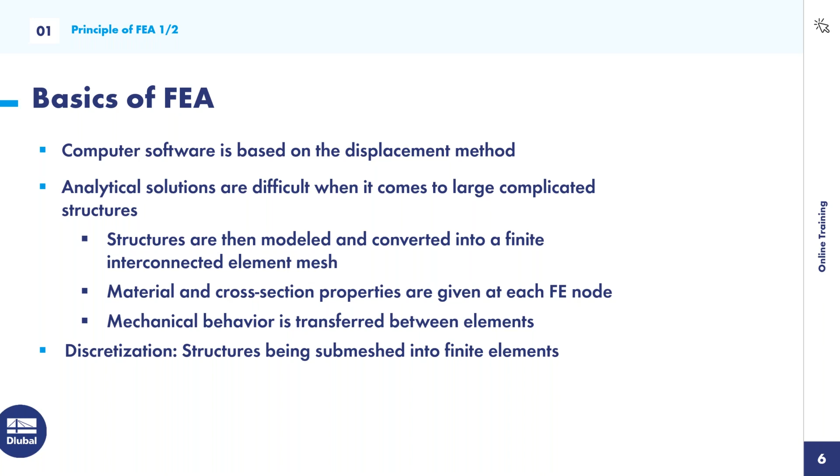The next thing to briefly get into is the FEA calculation workflow. I'm no expert on this, but I want to give you the overview and basic general knowledge of how the workflow is listed step-by-step and how it works within an FEA calculation.

The first step the program goes through is determining the local element stiffness properties. Second, the program changes stiffness properties at each node and converts this into the global coordinate system. Then the composition of the entire structure takes place.

Boundary conditions or supports are then defined, and these can consist of sliding supports, rigid supports, and hinge supports, as you may be aware of. Fifth, the displacement vectors can be determined by solving the system of equations, as we spoke about. Lastly, the support forces and internal forces can be determined—that is, the results of the structure.

With that said, with the general knowledge of how the workflow works for FEA, we can dive into our next example, which will be our continuous plate example.

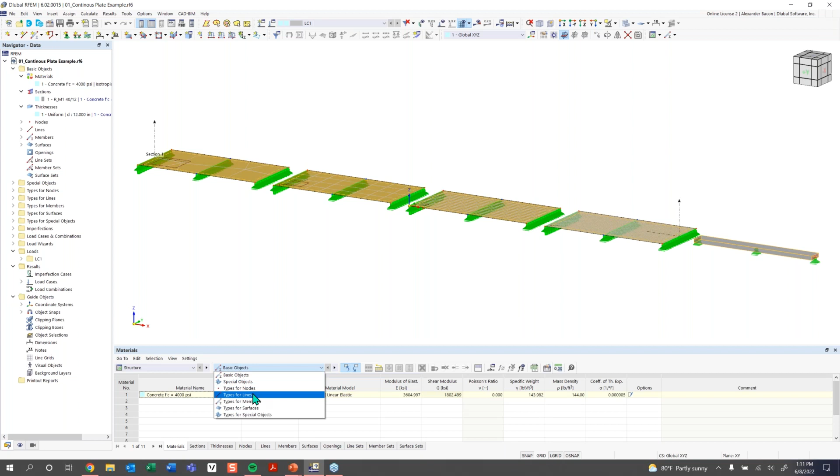Right now we're looking at our static analysis, but we can change this to just the structure. If we change the table here to structure, we can view all of our model data here listed and organized in these tabs down here. Basically anything can be edited down to the coordinates of a node.

So if I go to basic objects and node, you can see we have our coordinates for our nodes here, and these can all be adjusted. Also within the tables is where if any design work is being done, this is where all of the input data and results are going to be shown down here in the tables.

Next, you may notice that my background in my work window is white. Sometimes it can be black by default if you've just recently downloaded RFEM. The color of the background can be changed to whatever you would like. For example, if you go up here to options and you prefer a black background or a white background, that's under display properties.

In the general category, we have background here, and you can change your background color to basically almost any color you'd like. I'm going to keep mine as white, as I think for presenting it allows you guys to more easily see what I'm working with.

And that leads into the work window. Here's the work window. I can rotate my model, I can play around with it, I can manipulate it. So the work window is where almost all of your modeling will get done.

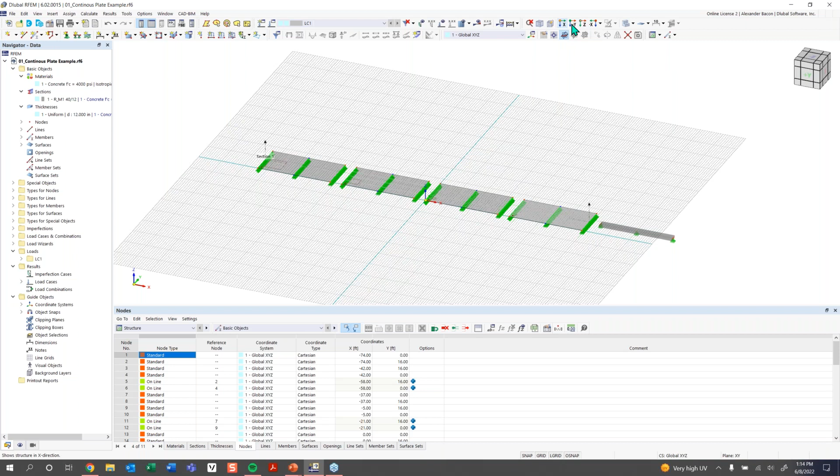Then next we have the views up here. You can use these view buttons to change the view of your model, like so. And a new addition is the cube up here, which also allows you to change your views as well. So this is one way to look at and change the view of your structure. You can also hit this button and it will give you an isometric view as well.

Next, in the navigator here, right now we're looking at the data panel. There are multiple tabs down here in the navigator. This first tab is called data. The second tab is called display. Within this display tab, I can collapse all of these subcategories, such as model and results. This display tab just allows you to turn graphically off and on anything that's shown in the window here.

It doesn't deactivate or remove anything from your model structurally. It just deactivates the graphics. So if I went under model here and turned off surfaces, you can see the surfaces disappear. This doesn't actually remove the surfaces from the structural analysis portion. It just turns off the graphics. You can also turn numbering on and off. So that's the display tab, where you'll find all of that stuff.

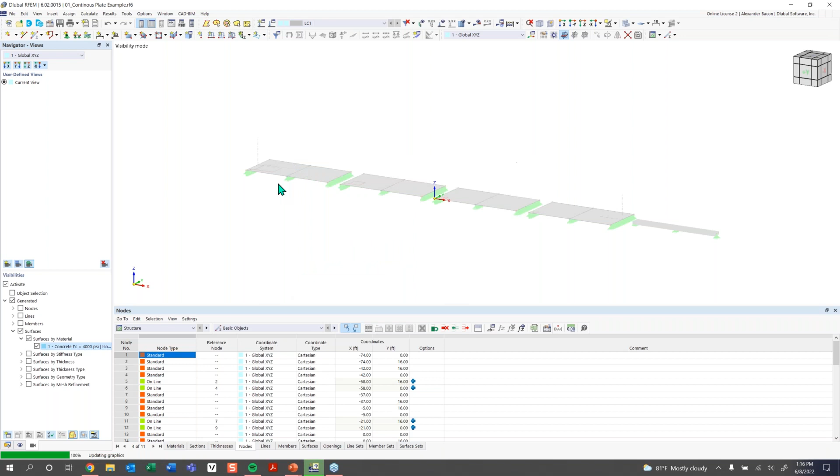Next, we have the views tab. This works a little bit similarly to the display tab, but with a function called visibilities, which can be activated. Once I activate visibilities, I don't have anything in my model that's deactivated. But let's say I only wanted to view surfaces that have a concrete material. Once I activate the,

Okay, so a little bit of a crash there. Let's just reopen RFEM by closing out of that. And we can open RFEM back up. Sorry, everybody. One second.

While that's opening up, which should only take a couple seconds, we can do a poll. Throughout the training I will be giving questions, and this is the next one. That will launch now. If everyone could read it and answer it, we can go over the results and the correct answer afterwards. I'll give everyone a minute, and we can continue after that.

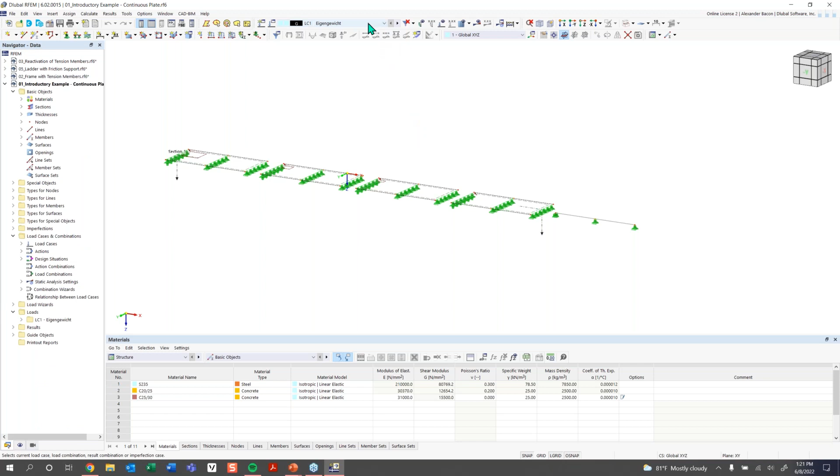Now jumping back into RFEM, the next thing I want to do is quickly run an analysis. So we're just going to run the results of this model real quick.

And then we're just going to quickly go over the results, nothing in detail. So just wanted to show you that once the results are run, this fourth tab here in the navigator panel is going to appear. As you may have seen before, we only had 3 tabs, but now that the results have run, we have 4 tabs.

And then you're going to see these collapsible categories here. So we can either show our deformations, member results, or surface results. And this is how you turn on and off the results you would like to see in the work window on the right-hand side here. So things like member internal forces, such as normal axial forces, shear forces, moments, torsional moments, things like that you can view on your members. And same with surfaces, you have internal forces and stresses, etc.

And also, when you're manipulating your model within the window here, if you have a mouse with a scroll wheel, you can click down on that middle button to move your model in translation. You can hold Control and click the middle mouse button to rotate the model, and then you can use the scroll wheel to zoom in and out.

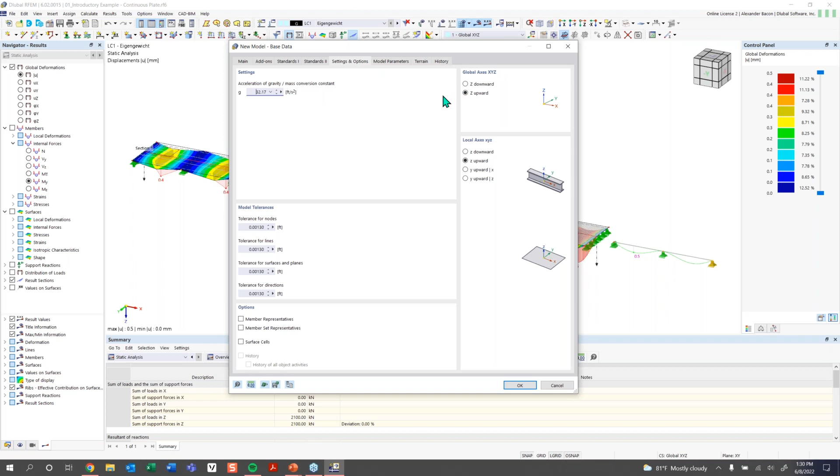And now everything else we don't need to worry about. These other tabs we're going to skip for now. And all we need to do now is click OK. So once we click OK, a blank model will open up. Sometimes materials from other models can be carried over into this blank model. So I'm just going to go under here and delete those. Maybe some other sections can be carried over as well that are previously defined. I'm also going to delete those along with some thicknesses that were defined as well.

So now you can see in my work window, I just have a blank grid here. Now this grid can be customized. So let's go into the settings for the grid plane here. You can see we have grid points here. So if we go up here to this button, settings of work plane, grid/snap, etc., if we click on this, we can take a look at our settings for our grid here. So right now, the basic information is that we have 50 by 50 grid points here. Right now, my units are in meters, as you can see. So those points are spaced by meters.

I know this is an international training, so that's why I want to show you that we can switch between imperial units and metric units. And you can do that in almost any dialog box. So you can see there's this button down here, units and decimal places. If we click on that button, you can see under model for all of my units that are related to modeling, they're all in metric right now.

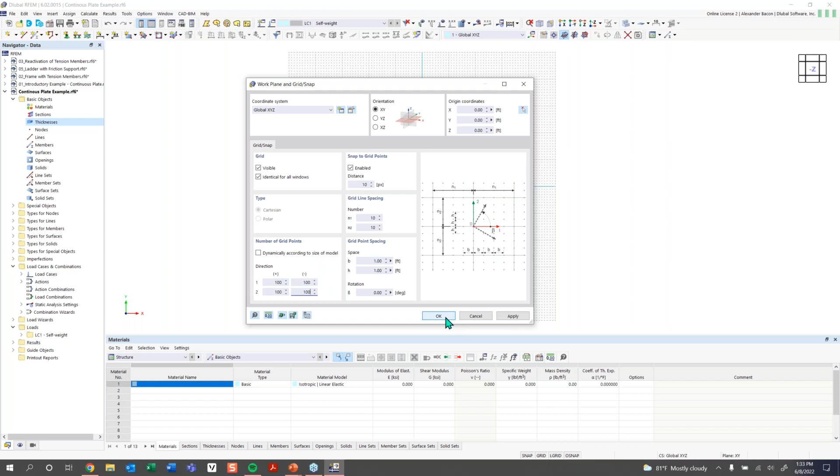For this model, I would like to change this from 50 by 50 to 100 by 100. So we can take that and I can just copy and paste the rest of this. So in the positive and negative direction and in directions 1 and 2, which you can see in this graphic over here on the right-hand side to help you understand that, it's going to be basically a 100 by 100 grid. So I'm going to click OK. And now you can see my grid here is, just going to save this real quick.

You can see my grid here is 100 by 100 now. And yeah, so now that we have the grid set up correctly, we can start to just model our first continuous plate. So I'm going to zoom in here and I'm going to go up here to new rectangular surface. And this is the first tool that we want to use. So I'm going to click on new rectangular surface to create this continuous plate.

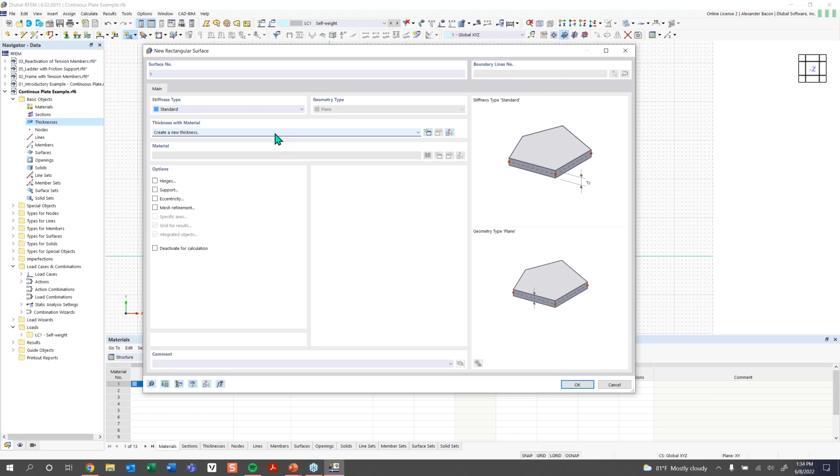And now you can see this dialog box will pop up called new rectangular surface. And then we just need to define a material for this surface and a thickness for this surface. So first, we need to define a thickness. So I'm going to click on create a new thickness here. And the new thickness dialog box will pop up. So basically with the thickness, you can see what that is defining on the right-hand side here.

Normally you can think about this as with a beam member or column. That column requires a material and a cross section. So as an analogy, you can think of the thickness as the cross section and then we just need to give it a material. So every surface requires a thickness and material. So we're going to make the thickness of this surface 12 inches. And then we're going to go here to material. And when choosing a material, you want to click on the button Import from Material Library.

And under the Material Library, you can see there is a filter section on the left-hand side here. So you can see you can filter by region. So we have a long list of regions that you can pick from to find your material. For this training, I'm just going to use some US materials. So I'm going to click on United States, and then I'm going to click on material type, concrete. And so then once I filter to the material type that I would like, you can see for concrete, there's the subtype of material. I'm just going to choose regular old concrete.

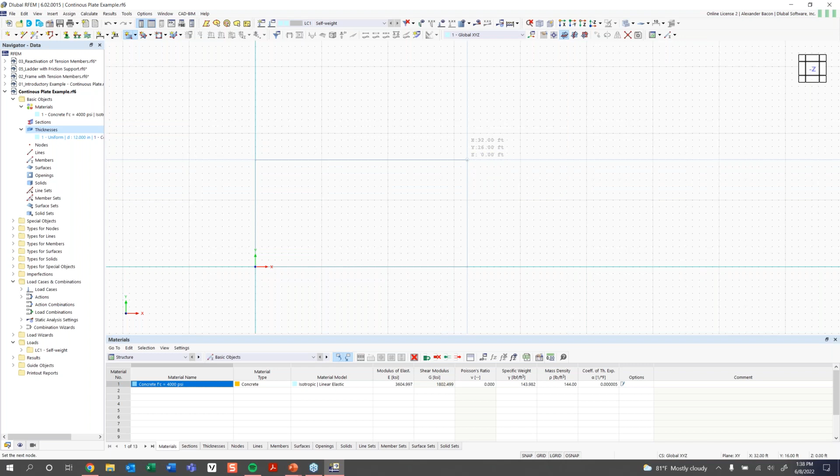So we're going to first snap to the origin here. So I'm going to left click on the origin, and this first surface is going to be 32 feet by 16 feet. So I'm going to go 32 feet in the X direction, and then 16 feet in height. And with the rectangular surface, all you need to do is define 2 corners. And so now you can see my surface is defined. And now all I need to do is either hit escape, or I can right click anywhere and simply exit out of that tool.

Now the next thing we want to do is draw a line down the center, directly in the middle of this surface. And to do that, we can go up here to the option New Line. And so you'll see the New Line tool will pop up, and now I can simply snap to the center of the top of this line here, left click, and just draw this line on top of this surface like so.

So that's how you can create a new line and draw a new line. So we can right click out of that and right click again to exit fully out of that tool. And now you may notice that these nodes here are a different color compared to the corner nodes here. And if we double click on one of these nodes to edit them, this is something I just want to go over real quick, is that these nodes are set to the node type On Line.

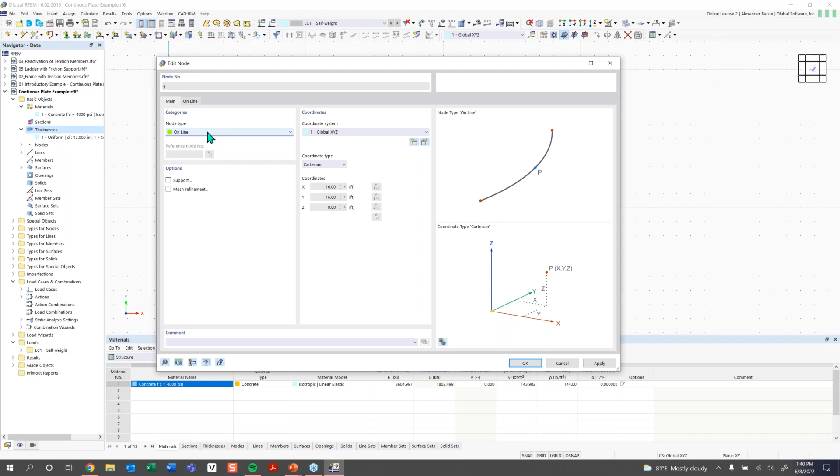And what this means is if I click OK, this means that these nodes are integrated into the line that they're connecting to. So if I double click on this line and edit it up here, and I go to the tab here, Nodes on Line, you can see that the node is being recognized and connected to the line that I'm editing. So if this node was set to just the normal standard type that nodes are usually set to, they wouldn't be integrated into the line they're connecting to. So this is done automatically, but just good for your knowledge to know that there's different node types.

Now, the next thing we want to do, now that we have our concrete surface here, is we want to support it. So we want to continuously support the left-hand side of this plate here. So that means I want to add a line support to this line here on the left-hand side. So to do that, we can double click on it to edit it. And then we have a list of options here. We want to add a support to the line. So that means this tab support here will pop up.

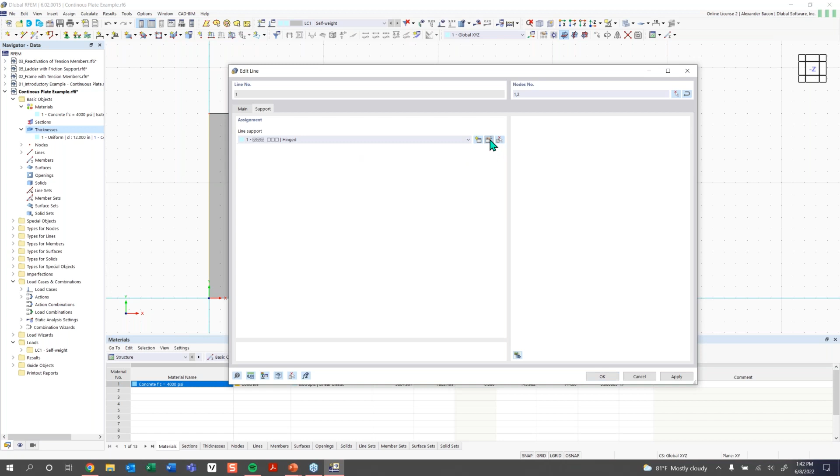And then under line support, we can hit this drop down. And you can see we have a couple of preset definitions for what our line support should be. I want this to be a hinged line support, and a hinged line support means that the first 3 degrees of freedom, or translation degrees of freedom, are fixed, so the support can't move in the X, Y, or Z directions, but rotation is fully released, so that is a hinge support. So we'll click OK, and click OK again, and now you can see if I rotate the model, we have our side here fully supported by those hinge supports.

So also another thing to point out is if I double click on my line here in RFEM, you will always see the nodes that are making up your line, or also if I edit this line support here, you always see the assigned line that goes with this line support. So in RFEM, you're always going to know what objects are connected to each other by this upper right hand corner here, and that kind of helps you understand what's connected to what. So always clear there.

So now we can highlight our other 2 lines here, which we would like to add supports to. So if I hold Control and I just select these lines, there's also a button up here called Assign Line Support. So I'm just going to select that tool, and RFEM is going to remember my selection before I clicked on that tool. You can see lines 3 and 5 here are selected. And none of these presets here are the definition of line support that I want. So I can create my own definition by clicking on the new definition button here.

And this support, I want it to be able to slide in the translational X direction. So I'm going to uncheck UX here, which fully releases the direction in the global X direction, but you can see it's still supported in the Y and Z direction, and rotation is still fully released about the X, Y, and Z axes as well. So I'm going to click OK, click OK again, and now you can see those supports are added to my lines there.

Next thing we want to do is now create a surface load, but before we can do that, it is very important to know that any loading that you apply to your structure must have a load case assigned to it or associated with it. So the next thing we want to do is create a new load case. So you can see we already have our LC1 load case here already created by default. The program will always create or have a load case that's already created. So what we really can do is just click on the edit active load case here to look at that.

So this is where you can create load cases. You can have multiple load cases, and these will go into your combinations, but we're not going to get into that this training. We're just going to focus on one single load case here. It has no action associated with it, and we don't need to worry about that since we're not doing any design or load combinations. So what we can do is just deactivate self-weight here on the right-hand side and delete the name of this load case, so it'll just be called LC1. That's how we will refer to it. I deactivated the self-weight since we don't want to take that into consideration, since we're going to focus mostly on how you can compare your models to your hand calculations, for example. So now I want to click OK.

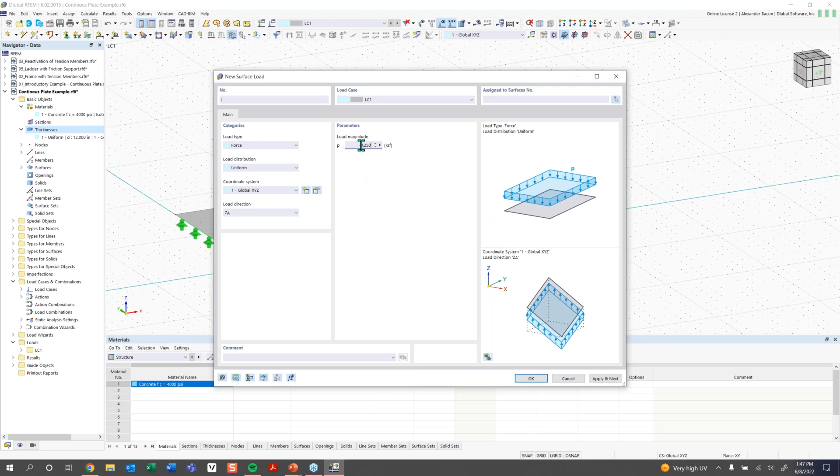So for the loading, we just need to give it a magnitude. It's going to have a magnitude of negative 0.25 KSF, or kips per square foot. We give it a negative value so it acts in the negative direction. So we'll click OK. Then all I need to do is tell the program which surface to assign this to, so we'll assign it to this first surface here. Now you can see visibly, or graphically, our loading here. Something else you can do is right click on this loading and adjust the size of it using this slider here, if you wish to do so. So now we have our plate here, it's supported and it's loaded.

Next thing I want to go over is the FE mesh settings, which are very important if you have a surface or any surfaces in your model. To access the FE mesh settings, we can go up here to this button, hit this drop down, and access what's called the mesh settings. This is always important to look at before you run any results. You can see these are the general settings, and right now under target length of finite elements, this is set to 1.64 feet, and this is going to be the global length that a finite element is set to throughout your entire model. So if this isn't changed, this will be the length of your finite element.

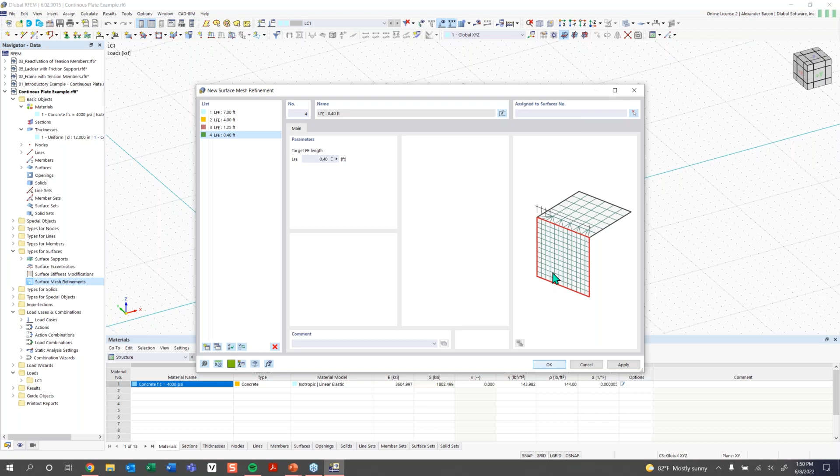The next thing I want to do is make a copy of my surface here. I'm going to highlight the whole thing, and use what's called our move/copy tool. With this tool, you can move something, make a copy of it, or do both at the same time, which is what we're going to do. We're going to create a copy, and we're going to create 3 copies of the surface, and we want to displace them 37 feet into the X direction. This allows for a 5-foot spacing between each of these copies, since the surface is 32 feet long. So now all we need to do is hit OK.

Now you can see I made 3 more copies of my surface here with all these supports and everything, and they're each 5 foot spaced apart.

So now with our copies made, we want to create our single member, or beam member, that we're going to use to compare results to.

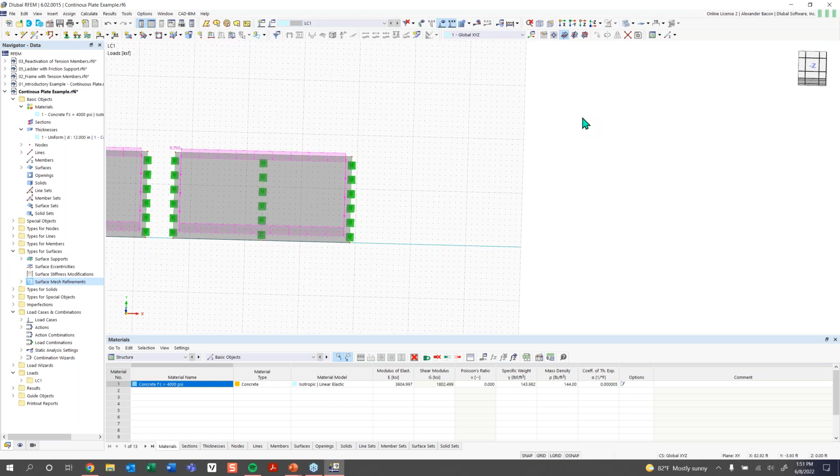My grid here is a little off, so I'm going to highlight all of these plates and drag them to the left a bit so we have some space on the right hand side to model the member. I'll hit reverse z-axis direction, then go up to the button create new member.

Under new member, we're going to use the member type beam. This member type allows the member to take tension and compression forces and have fully fixed connections.

What we want to do now is tell the program what cross-section this member is going to have and what material it's going to be made of. To define the cross-section, go down to section with material and click import from section library. Here is the cross-section library in RFEM 6.

You have different categories here. The category we're focused on is the massive category, where we can choose our massive rectangle section. With this section, you can define the material. I already had a preset of our concrete 4000 PSI material, an isotropic linear elastic material.

If this wasn't already defined, you can click on the material library, which is the same material library we've looked at throughout, from the surface.

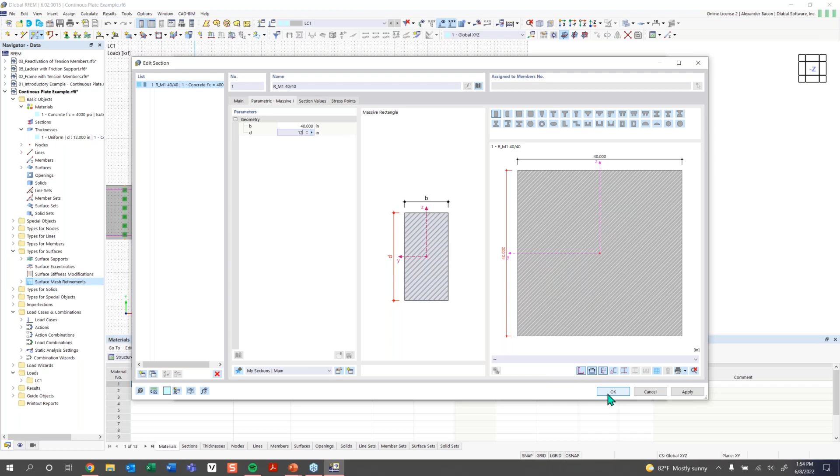Next we want to define the parametric massive, or the dimensions. So we'll go under the parametric massive tab. I'm going to define the base, which is going to be 40 inches, and then the depth of the section is going to be 12 inches. This is similar in depth to our surface, which is what we're comparing to. With that defined, we click OK and OK again.

Now I can just draw my member, like how I drew that line before. I'll start drawing it 5 feet away from our plate, right in the center. I want this member to be the same length as the plate, which was 16 feet, so I can draw that, or just type it on my keyboard without moving my mouse: 16 feet, and hit enter.

Actually I wanted to make that 32 feet, sorry about that. Control Z real quick, and let's draw that one more time — I wanted that to be 32 feet.

There we go. Then I can right click, and now you can see we have our member drawn the same length as our plates here.

Now this member is just floating in space right now, so we need to support it. I want to add a support directly in the middle of it, and to do that I need to add a node.

What I can do is divide this member by right-clicking on it, which brings up my shortcuts menu. I'll go under member, divide member by a number of intermediate nodes. We really need to divide it by one node, so we're adding a node to the middle of the member.

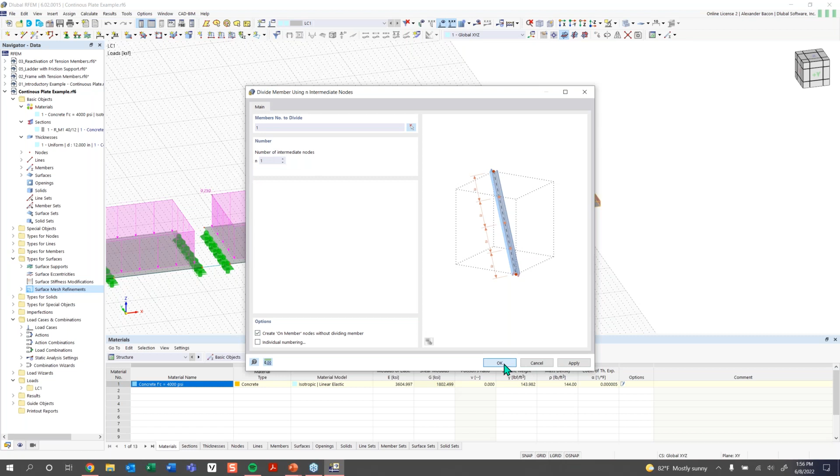And now it's a little hard to see that node, but it's right there.

So now if I just highlight this first node here, we want to add our nodal supports. I'm going to go up here to nodal support instead of line support, since this is for nodes. We'll click on nodal support.

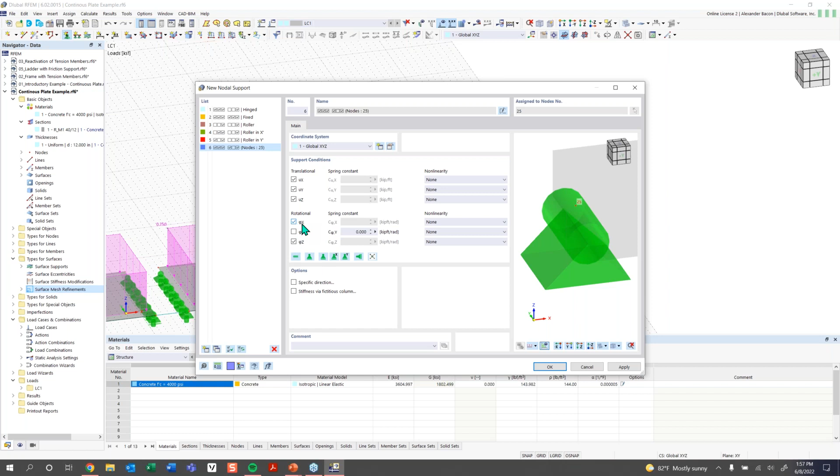And we want this support to actually not just be a hinge support. You can see we have some presets here for nodal supports. We're going to want to create our own definition here, and I will explain why in just a little bit. But we want all of our translational degrees of freedom to be fully fixed, but we also want our rotation about the local x-axis of our member, or about the global x-axis of our member, to be fixed as well. So we're going to click OK.

Click OK again, and so now you can see that support, the rotation about the x-axis is fixed there. And now we're going to add in our other supports. So our other two supports for the middle and end of our member are going to be rolling supports that are allowed to roll or move along the global x-axis here.

So we'll click OK. Oh, I just changed the support by accident. Let's just undo that. So again, we're going to choose rolling support. And with this, now we can just assign our support to our nodes here.

So the reason we needed to fix the rotation of the local x-axis for this one is if we didn't do that and all of these had the rotation fully released for all 3 degrees of freedom, this member would be allowed to spin about its own local x-axis indefinitely, causing an instability in the program. So always keep that in mind when you have a member that has torsion fully released on it, as that can cause an instability in the program.

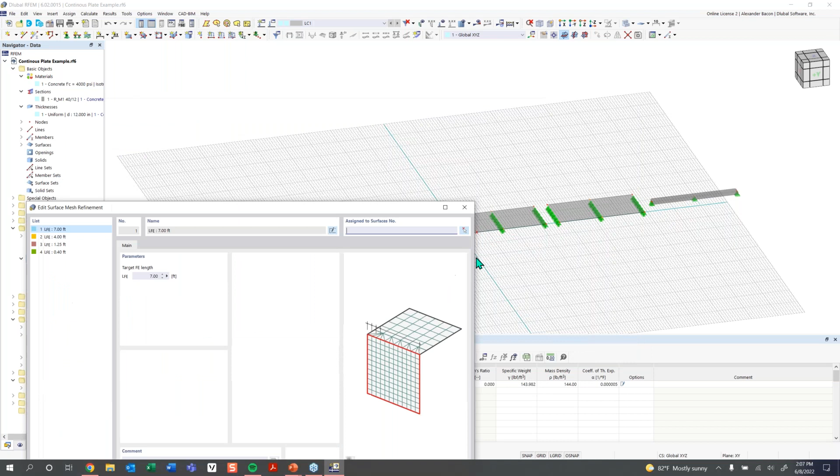So what we want to do is I'm just going to right-click on surface mesh refinements, hit edit, and go through here and assign them to our surfaces. So we're going to assign this first one to our first surface, and you can see we can do that graphically by hitting the button there and clicking on our first surface, clicking OK. We can do the same thing for our second refinement. Select surface here, select our second surface,

and then for our third one, again, we can do the same thing graphically, or if we know the number of our surface here, we can just type in 3, since this is surface 3 here, and then type in 4 for our last refinement, and hit OK. So now they change from blue to normal default color, and you can see we have these icons here now on top of our surfaces. And this is how you know that there's a surface mesh refinement on top of our surfaces here.

So now that we have those refinements, we can generate the FE mesh. And so to generate the FE mesh, you can do this manually. Normally this is just done once you run your results, but you can generate this mesh manually. So if we go up here to this drop down here and hit generate FE mesh, this will run the solver, and then our mesh will be displayed on our surfaces here.

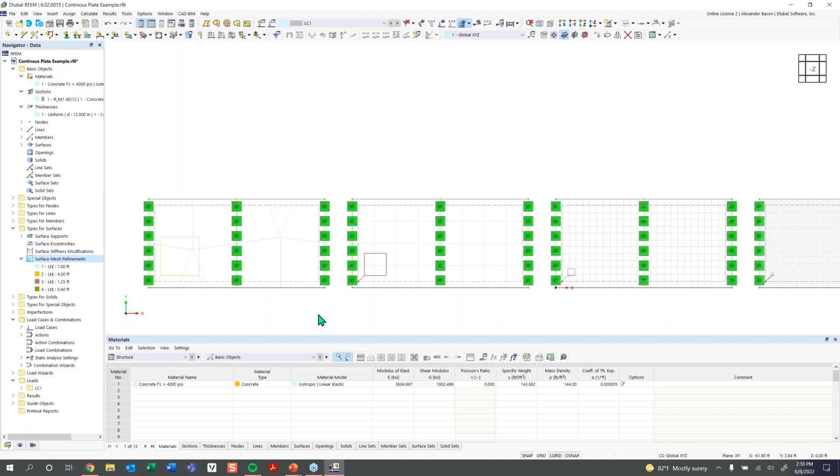So you can see gradually as we move from left to right here, our FE mesh starts out pretty wonky. And then the smaller the finite element gets, the finer our mesh gets and starts to look a lot better. So this is as we, from left to right, decrease the size. This first size was 7 feet, and you can see it goes from 4 feet to 1.25 feet and gets smaller and smaller. So this first surface here, I would expect very inaccurate results from this surface. And as we move from left to right, the quality gets better, and I would expect very accurate results from surface 4 here on the right hand side.

So the next thing we want to do now that we created our FE mesh is add in a results section that will cut through our surfaces here. So to do this, we can go up here to this button, set new results section. And to set a new results section, it just needs 2 points, point A and point B. We can click on this button up here, select 2 points graphically, and you can see I can snap to the center of my first surface here.

And I'm going to draw this results section all the way through all of these surfaces here. So now we'll have a result plane section cut through all of our surfaces. And this is based on the global coordinate system, and it's going to be set in our global z-axis. So that's where the plane will be located, projection direction, and we can click OK. And now you can see we have these arrows here for our section cut. So it is in the global z-axis plane, and that's how our results will be shown.

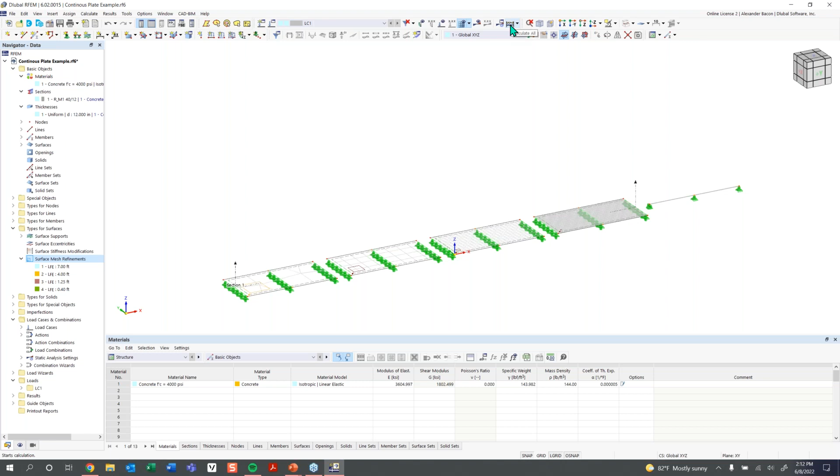So now we can calculate our results. We can go up here to this button called Calculate All. I'm going to click that, and RFEM will run through the solver and go through that FEA workflow that we talked about earlier and give us our results. Right now it is showing us the deformations, and also you'll see the results tab will pop up here. And whenever you run your results, I always recommend taking a look at the global deformations first. This is always just an easy first visual way to check that everything is defined correctly and everything looks as you would expect.

So if I look in this side view here of our model, the deformations are looking good, and they're looking just as we would expect them to look. Now, whether this side is accurate or not is up for discussion, but the internal forces are also the next thing we can take a look at. So we can turn off global deformations up here and check on members here.

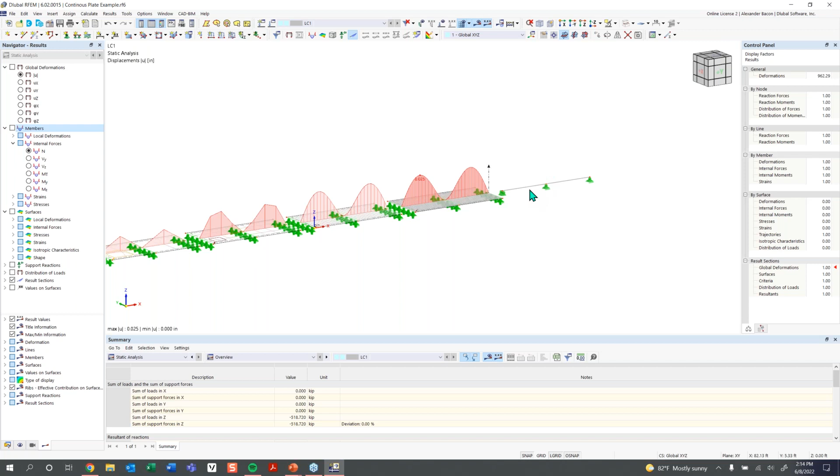And before we check on the results for the members, what we want to do is compare the results of our last surface here with the results of our beam here. So what I'm going to do is select my surface here and select my beam. And what I can do is create a visibility by selected objects using this button.

And now you can see the other objects have been grayed out in the background, and now the only ones visible are the plate here and the beam. And what I'm about to show you is very important. So if we take a look at the results on the member, I'm going to check those on. You can see, one second, that my internal forces should be shown.

Oh, so what we need to do is check on moment. So we have checked on the results for members, and then under the internal forces here, we want to check on moments about the local y-axis. So that's what's being shown right here on our member, the moment about the local y-axis of our member.

So if you ever need to see how the local axis of the member is oriented, you can right click on any member and turn on the local axis system of the member. And so now you can see what that local axis system looks like right on the member, and you can see the moment distribution about the y-axis here. Let me turn that on.

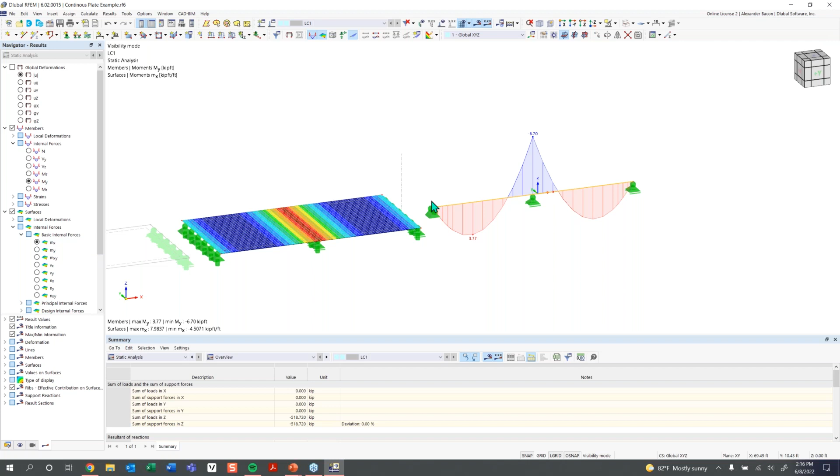This means that for the surface, these are our bending moments in the direction of the local x-axis of the surface here. So if I right-click on the surface, I can turn on the local axis system, and you can see the direction of that. And so we're showing the moments along that axis.

And so now if I turn on my results section, or I'm going to have to cancel out of this visibility. If I select these plates and members, there we go. So now you can see we can compare directly the moment distribution between our beam and our plate here. And these should be basically the same.

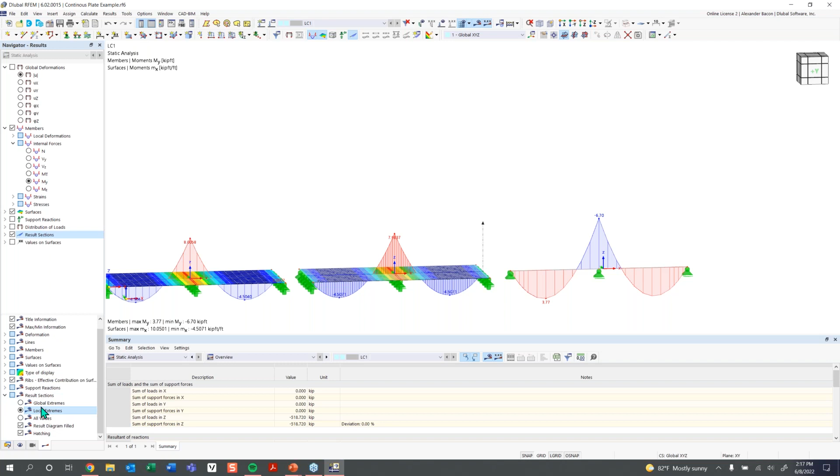So I'm going to also turn on results sections down here, turn on local extremes. So you can see that we have our results here, and they should be pretty close to the beam. And also we can show our shear force distribution as well. So I'm going to turn on the shear force in the Z direction, and then turn on the shear force for our surface in the X direction. And so we can compare those two.

So I was wondering why our results are a little off here. So you can see I typed in the wrong magnitude here for either the beam or the plate here. So I'm just going to change this to negative 0.25. And then rerun that calculation real quick. And we should see better comparison between those two elements.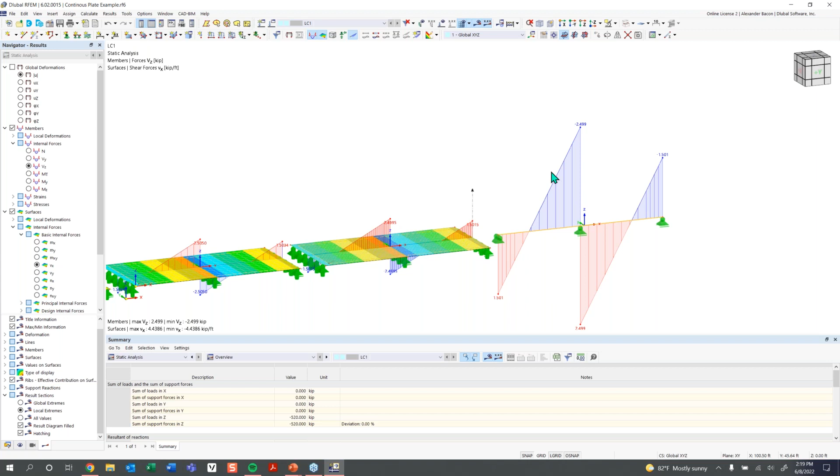Okay, so now you can see we have a max shear force here of 2.4995 and a max shear force here of 2.499. So you can see between our plate and our beam here, we're getting very similar results. So this is how you can view the internal forces of a plate or beam.

And I just want you to keep in mind for these forces here, what the lowercase axis symbol shows, and these all refer to the local axis system of what they're showing, so for surface and beam. So I'm going to clear those visibilities.

Also, there was a question about how to show the values on a surface, so I'm going to show that real quick. To show the values on a surface, we can simply go down here to values on surface and check that on.

And then you can see that the value is shown for each, if we go down here to result values, or we have to go to, if I can find it. So we have values on surfaces turned on, and then right here under values on surfaces, right now each value is set to a grid point. We can also change this to each FE mesh point, and you can also turn on symbols and numbering.

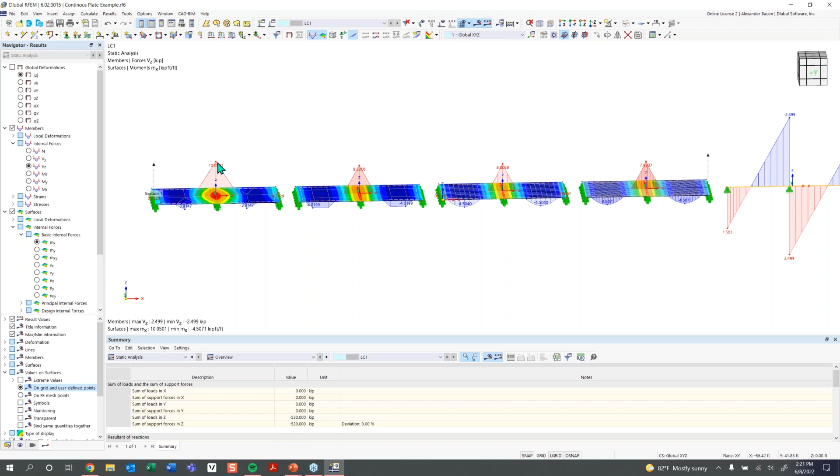So if we take a look at each plate here, you can see that the bending moment is different for each one. Starting with this plate here, we have about 10 kip foot, and you can see how that's decreasing, and each plate here with a decreasing mesh size is getting closer and closer to our control member here, which is what the result should be closer to. So you can see how inaccurate the results are for this plate with the super coarse mesh size.

So this shows the importance of making sure that your FE mesh is as fine as necessary, but as coarse as possible, because if you don't check your FE mesh before running results, they can be inaccurate. But also, it's important to keep in mind that if your FE mesh is too fine, such as this last plate here, this can increase your calculation time. So if you have a large model and too fine of a mesh, your calculation time can greatly increase. So what I recommend is something like this third example here, where it's as fine as necessary, but as coarse as possible.

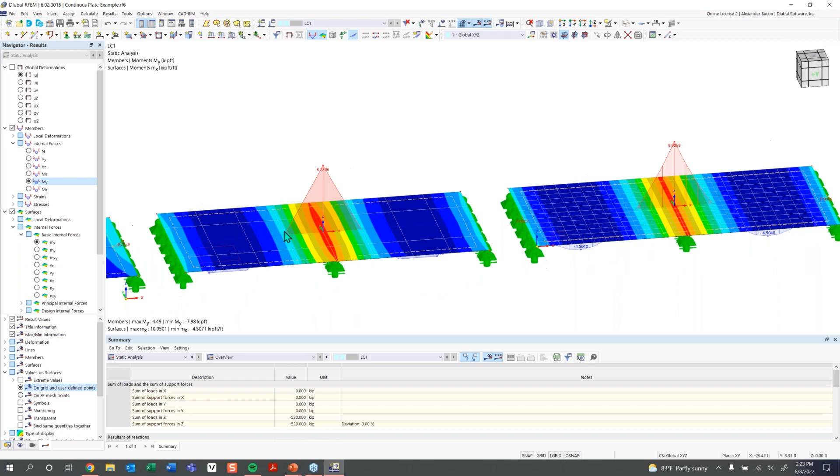And another good rule of thumb to keep in mind is to have at least 4 FE mesh blocks between any span or boundary of your surface. So 4 FE mesh blocks between any line here is probably the minimum you want your mesh to be at. So something like this would be too coarse, where we only have about 3 FE mesh blocks, or is that we have 4. So this would be about the minimum of how fine you would want your mesh to be. But as you can see, the finer the mesh, the more accurate the results.

So next thing to look at real quick is the result diagram of our section here. So if we right click on our section, we can take a look at the result diagram. So right now we're looking at the internal forces mx along our result section here. And this is interesting because you can see what changing your mesh size does, and having a finer mesh adds more data points along this line. And the more data points, the better our moment diagram starts to look. So you can see it starts off very rough and then gets finer and finer.

Now I'd like to get into talking about shear stiffness. So with shear stiffness, such as for this beam, if you want to do hand calculations and compare them, you would have to take into account shear stiffness effects. Taking into account shear stiffness leads to increased deformation due to shear forces, and that also leads, in turn, to increased moments. So this also plays a major role with things like concrete, because the thicker something is, the more shear stiffness deformation effects you will have.

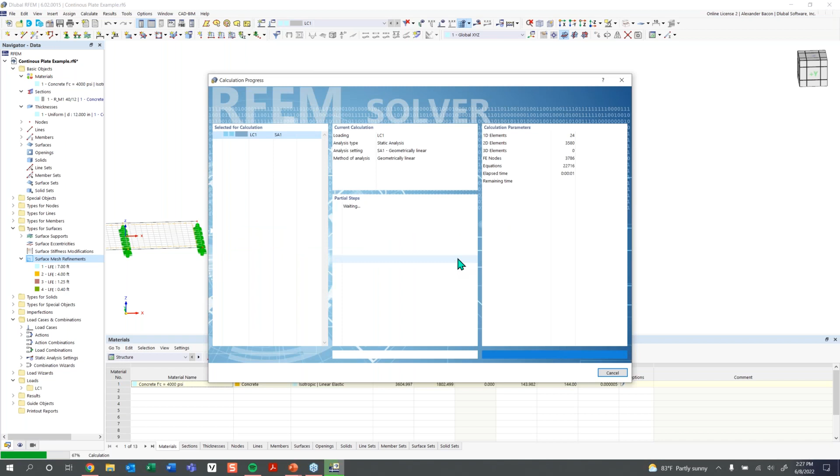So if we deactivate shear stiffness and click OK, the program's going to tell us this is going to require us to delete the results. We'll click yes, click OK again, and now we can run our results again, and we should see our results change based on checking off this option.

So now you can see we have an increased moment here a little bit. Results haven't changed too much, but you can see the moment has increased by a little bit. And this is because we deactivated the shear stiffness, or taking it into account with this beam.

So now I would like to just give another question or another poll. So I'm going to throw that up on the screen now, and you should see that in just a second. So I'll give everybody a minute to answer this question, and then we can go over the results and answer afterwards.

So the first theory for beam elements is Bernoulli's, and the second theory is the Timoshenko theory, or what's also called the deep beam theory. So with the Bernoulli's theory, we're making some assumptions, and these assumptions are first that the cross section remains in plane and also perpendicular to the member axes. And the second assumption is that we do not consider any shear deformations. And what this means is that the shear stiffness of the beam is completely rigid. So that's the assumptions that are made with Bernoulli's theory, and this is what you're probably familiar with when doing hand calculations.

The assumptions we make with the Timoshenko theory is that the cross sections remain in plane, but they don't remain perpendicular to the member axes. So the shear deformations are taken into consideration here, and the shear stiffness is limited and is not completely rigid. So this is the more realistic approach, and also you can see down here that we're not only taking into consideration just the deformations from bending, but also deformations from shear as well.

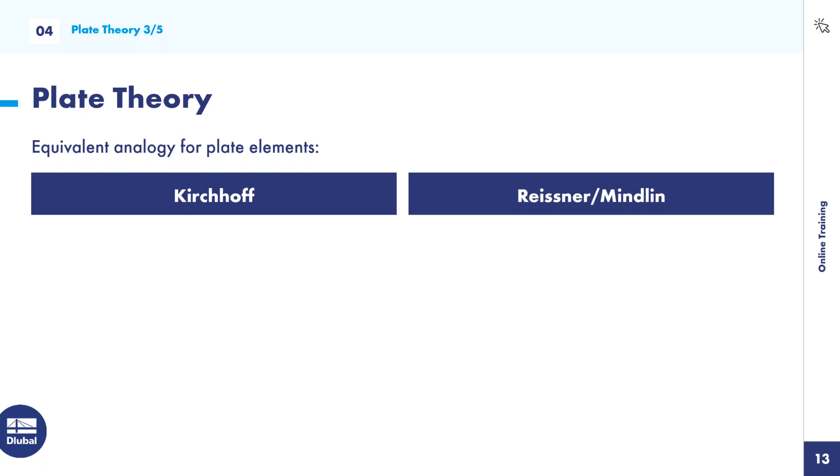So here are the assumptions. So for Kirchhoff's theory, we assume a geometrically linear or small deformation analysis. We assume that a linear elastic material is used, so we're referring to Hooke's law. We're also assuming that the cross-section remains flat and there's no warping of this plate. The plate has a constant thickness. And we're also assuming, which is the biggest assumption, that there's no consideration of shear deformations. And that's with Kirchhoff's theory.

Now, maybe you'll be able to guess, but with the Reissner-Mindlin theory, we're assuming all of these same assumptions basically, but the major difference is that we are taking into consideration shear deformations, and including this, we are taking into consideration transverse and lateral strains. And so to clarify a little bit more on transverse and lateral strains, we can go to the next slide here. And here we can get a better look at what the transverse and lateral strains look like.

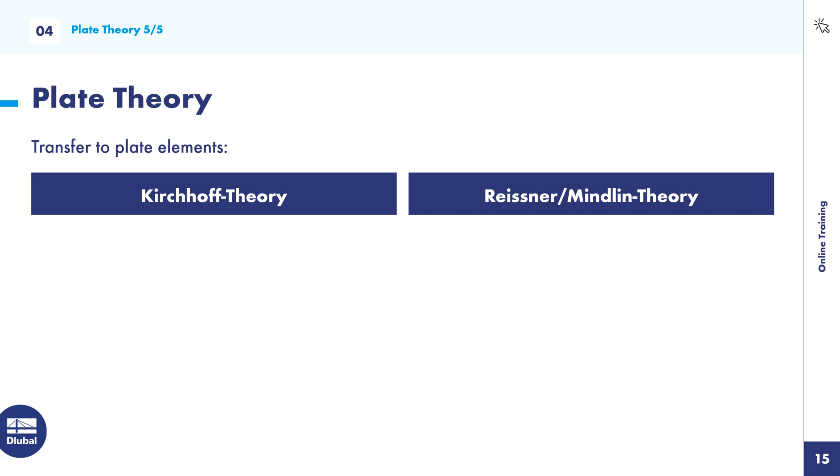So again, just to summarize, Kirchhoff's theory for plate theory yields pretty good results when using very thin plates, for example, concrete slabs, like the ones we're using in our example. But you have to keep in mind that this only considers pure bending load bearing capacity, and this is just a simplified approach, but works fairly well for thin plates. Again, no consideration of shear deformations with the Kirchhoff theory as well.

So Reissner-Mindlin theory, on the other hand, is great for thin plates and thick plates. So the thicker the plate gets, the bigger the delta you'll see in the difference of results, and the more inaccurate Kirchhoff's theory becomes because of the shear deformations. The effect of shear deformations will greatly affect the thicker plates. And so in my opinion, the Reissner-Mindlin theory should just be used by default, but it's just good to know the difference between the two.

Now we can go back into RFEM and look at where these settings are located. So I'm going to switch back to RFEM. And if we go under the navigator here and we go under data, we can go under the load cases and combinations here and go under the static analysis settings, and we'll just go under the geometrically linear settings and edit these. And if we edit them, we can go under basic settings here, and you can see that the plate bending theory here, you can change between Mindlin or the Kirchhoff theory. Like I said, Mindlin should just be used by default, but it's just good for your knowledge to know that we have the option between these two theories.

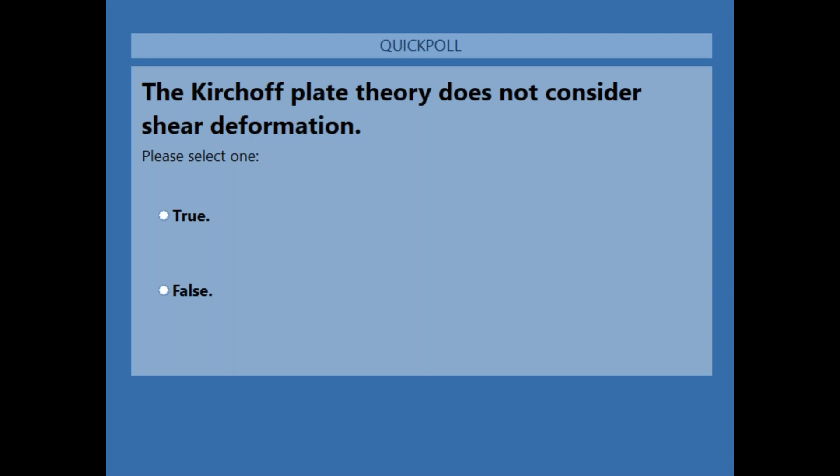All right, so I'm going to close that question and show the results. Awesome, everyone got this one correct. So the Kirchhoff theory does not consider shear deformations. That is true. The Mindlin theory does consider shear deformation, so great job. All right, I'm gonna hide that.

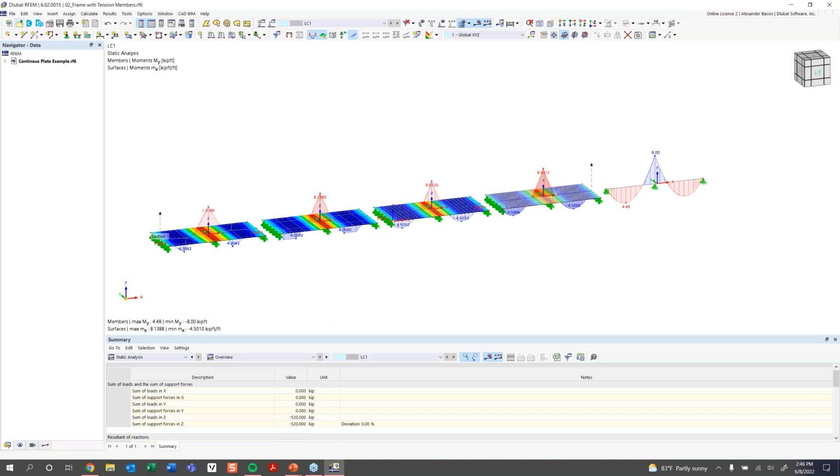So we're going to go back to RFEM and look at some examples of these nonlinear calculations. I set up another model, and I'm going to open that right now. Again, these models are going to be provided to you guys. You'll get them with the recording early next week or the beginning of next week, so I would expect these to show up on your end at that time.

For this model, I set up a frame, and this frame has some tension-only members in it. If I double click on one of these members here, on this cable element from this X bracing, you can see that the member type here is set to tension.

With this frame, we're going to just imagine that the top of this frame here is connected to another building. I'm going to turn off the grid here so we can imagine that the top is connected and braced by another building, and so we need to basically brace this wall in the global X direction here. This is the reason why we needed to add this X bracing in.

Like I said, this X bracing, we're assuming that these elements can only take tension, almost like a cable element where the cable or rope just cannot take compression forces. This is a nonlinear element, meaning that it can only take tension.

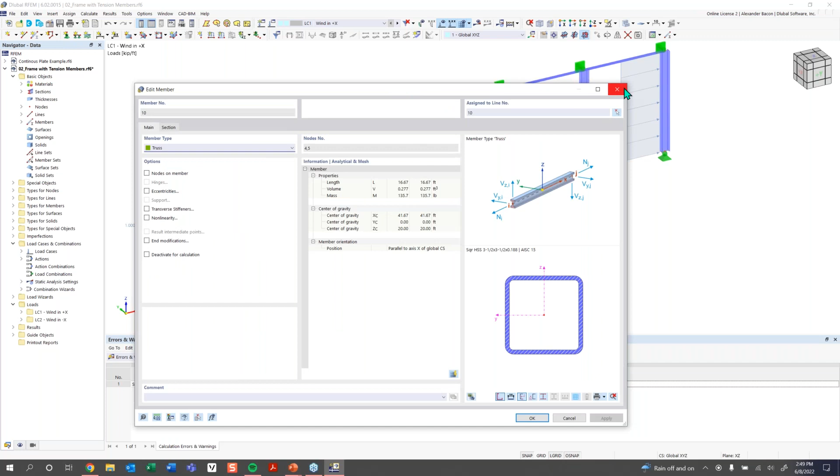The reason for this is because our structure here is just not stable and needs support in the global X axis. You can see that we have all hinge supports here, and these supports up here are not providing any support in the X direction. All of our connections here are hinged, and our members up here at the top are truss members, meaning that the moments at these connection points are fully released. So this whole model is just not supported in the global X direction.

So what we need to do is stabilize this model. And how can we stabilize it? We can do that by adding in X bracing. So I can go up here to new single member, and under new single member, you can see we have member types. So we have beam.

Beam type is the type you are going to be most familiar with. This can take tension and compression and has fully fixed connection points, meaning moments and shear forces are transferred between connections. We have a truss type here, which can take tension and compression, but it can't take moments.

The connection points are fully released, so no moments are transferred between connections. And then we have our tension members. Our tension members can only take tension and cannot take compression. So these are our nonlinear members here.

What we want to do is go into our section here and change our cross section to a 1/4 inch round section here, which will act as our cable element. We'll click OK, and now we can draw back in our X bracing here.

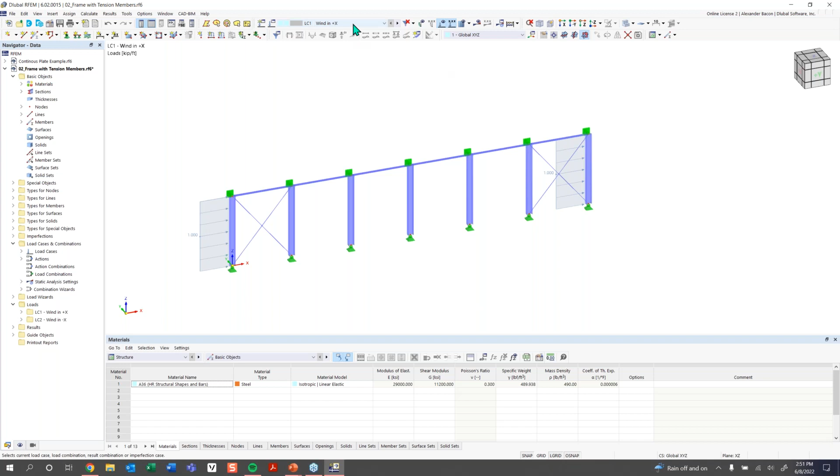So now you can see that we have our results now. And if we take a look at our deformations, we can turn off our loading. You can see that this member right here has extended since this structure has a wind load on it being forced into the X direction.

You can see that this cable element is still activated and taking on those tension forces. But this one here has been grayed out and disabled because it's taking compression and it cannot do that. You can see the same thing for this tension element on the right-hand side.

We can also take a look and check on the results for our members and take a look at the normal forces or axial forces. And now we can see what the axial forces are on those two cable elements that are taking the tension. So red is positive for tension, and you can see the blue here is negative for compression.

And then if we also take a look at our wind loads in the opposite direction, we should see the same thing. So we'll run that.

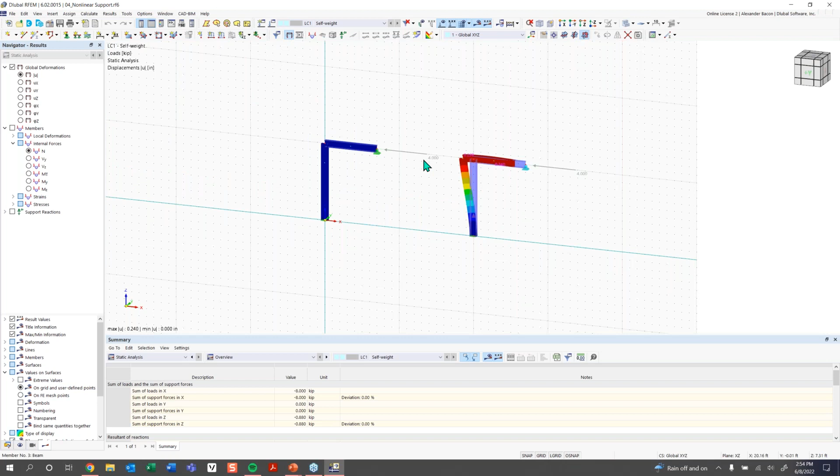That's here. So this next one, we're going to be going over nonlinear supports. With this model, you can see here, I just have two frames here supported at the top here. And you can see that I have on the right-hand side this nodal support here in blue.

The reason why this nodal support is in blue is because it's telling me that it's a nonlinear support. So anytime you see a support that's blue and not green, that means it's a nonlinear support. Green means that it is a linear support. So let's double click on this support and see what's going on and edit it.

You can see under our definitions here, everything looks normal here. All 3 degrees of translational freedom are fixed here. Our rotation about the global z-axis is fixed. But for the x direction, we have a nonlinear set.

If I click on this drop down here under nonlinear, you can see I have checked on failure if negative px. What this means is if this support experiences a negative support reaction, it will fail. It'll disable, it won't add any support if a negative support reaction is activated.

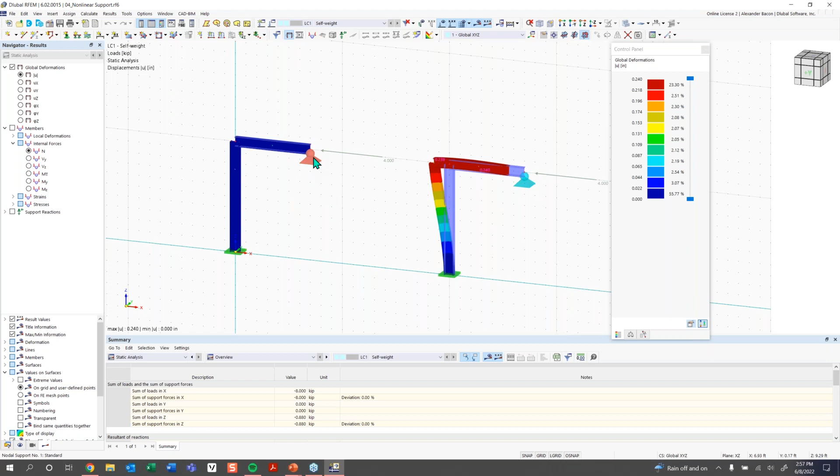You can see this lateral load is pushing on the top of this frame here in the X direction. So this support is going to have a negative X support reaction, but it's a linear support. And you can see here on the right-hand side that our nonlinear support with the same setup is failing because it's experiencing that negative support reaction. So it's disabling, and you can see how that affects our frame here.

And we can also take a look at our support reactions by turning on support reactions here, and we can see those support reactions from the forces there.

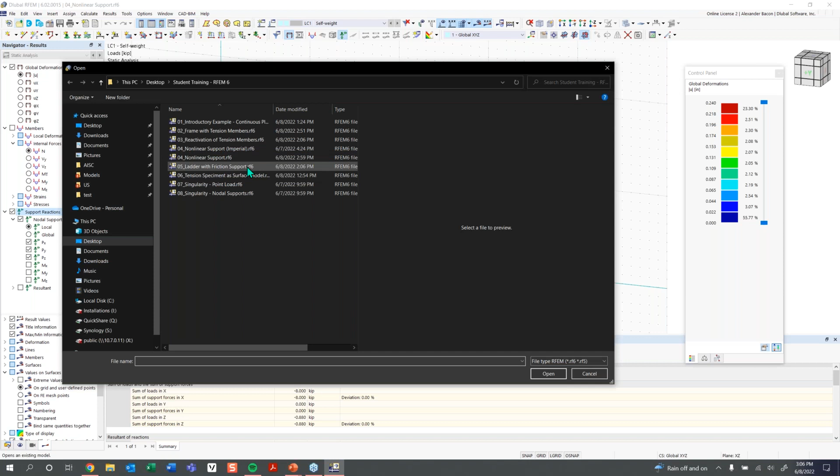And so yeah, that was the last example that we did. So the next example to get into is going to be called a friction supported ladder. I'm going to open up this next example here, and we're going to talk about friction supports.

All right, so here you can see I have modeled and created this ladder here. And with each support here, you can see that each load case has a support that's set to each step here. So I can go through each load case, and you can see that with each load case, the loading gets higher and higher.

On this ladder here. And the goal of this is to see if the ladder is going to receive too much vertical load and if it will slip into the X direction.

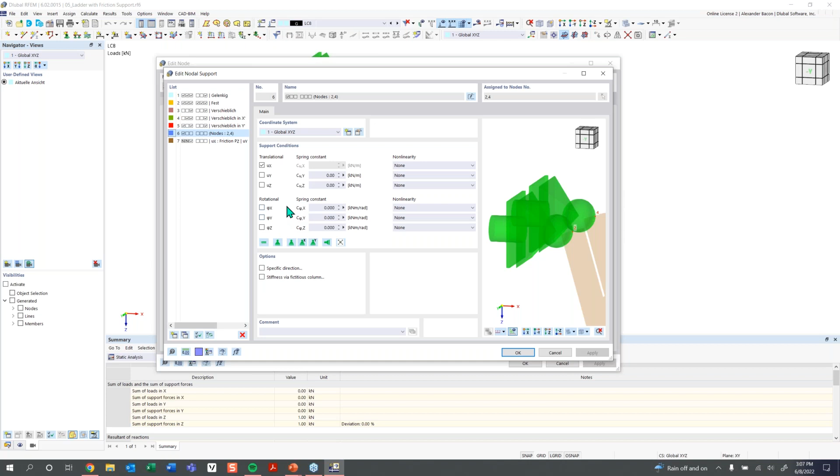So you might have noticed that the top supports here are green, so they're linear. You can also see that they are only supporting the top of this ladder in the X direction. They're not supporting it in the Y or Z direction, and they're not giving it any rotational support. So we're basically assuming that this ladder is just resting up against something, up against a wall like a normal ladder would. It's just resting up there.

And we're wondering, okay, at what point will this ladder slip the higher and higher somebody climbs it? We want to make sure that the friction at the bottom is enough to keep this ladder from slipping out into the X direction the higher and higher somebody climbs it.

So what we did is we made these supports down here nonlinear supports. So if I edit these supports by double clicking on them and looking at the definitions of them, you can see that there's no rotational support.

They are fully fixed in the Z direction, so they're resting on a solid surface, but this ladder could slip out in the horizontal or lateral direction. So you can see in the X direction and the Y direction, we have activated the nonlinearity friction, PZ.

And so activating these, you can see that now we have some new tabs up here for UX friction PZ and UY friction PZ. Now if we look at UX friction PZ, you can see that we have entered here a friction coefficient. And you can see μx, this friction coefficient, is set to 0.2.

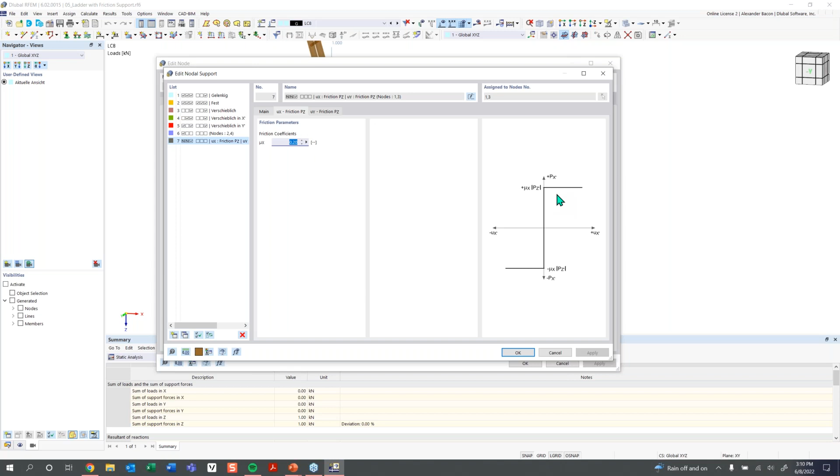And this basically sets a maximum bearing capacity for the support. If the reaction in the X direction exceeds the normal force, Pz, multiplied by this friction coefficient, then the support will fail. So basically the ladder will slip out either in the X direction or the Y direction. So again, this maximum bearing capacity all relies on what the normal force is multiplied by the friction coefficient. If that exceeds the reaction in the X direction, then this support will fail and give out.

So let's click OK, let's click OK again, and let's run all of our results and see what happens. So just looking at the deformations, we can see that for this first load case, where our loading is applied to the bottom rung here, we're fine, the ladder is staying in place.

But as we go to our next load case, as the force starts to go upwards, we can turn on our support reactions and see what our force is in the x direction. You can see we're at 0.03 here, and we're at 0.5 here for the normal force, and as we increase our loading higher and higher, you can see that the reaction in the x direction is increasing: 0.05, 0.06, 0.07, 0.08, 0.09, and boom, at load case 12

here, as we approach about 3 rungs down from the top of this ladder, you can see that our supports have given out, and the ladder is now slipping out because we have reached a reaction force in the x direction of 0.10 kilonewtons, and so this is exceeding our 0.2 multiplied by 0.5 here for our horizontal x direction. So these supports have released and given out, and now our ladder is slipping out.

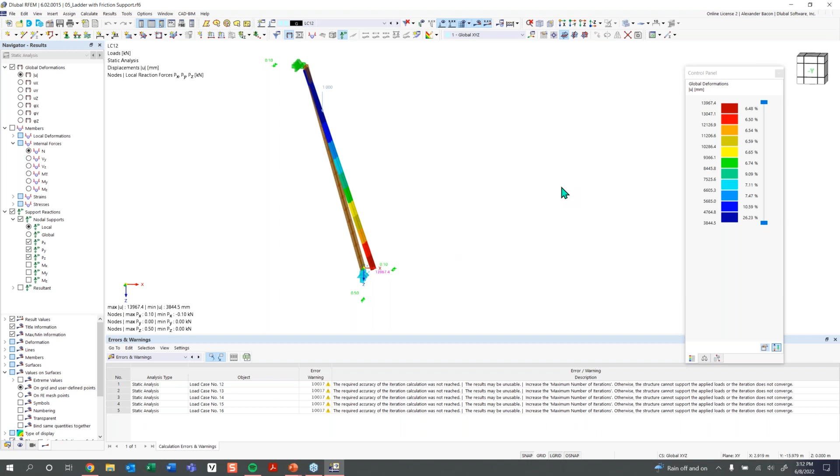So this is basically how you can use friction supports in RFEM and how useful these can be. And this is just one example of how friction supports can work and how they can slip. So moving on, our next example is going to be all about plastic analysis. So I'm going to open up the next model here.

So now with our next model here, this model is just a specimen of some sort, similar to something you would see in one of your material labs. So we can use this to go over the general concept of plastic analysis. The elastic deformation in a structural component is due to a load and is based on Hooke's law. And Hooke's law is the linear stress and strain relationship which most materials go through if it is a linear elastic or isotropic elastic material.

So you might want to take a look at and see what happens after the elastic behavior of the material. Maybe you're curious about what happens after that material is no longer elastic and has entered the plastic region. You might want to see how it's yielded and what the behavior of that component is going to be after it has yielded, and that's basically what plastic analysis is.

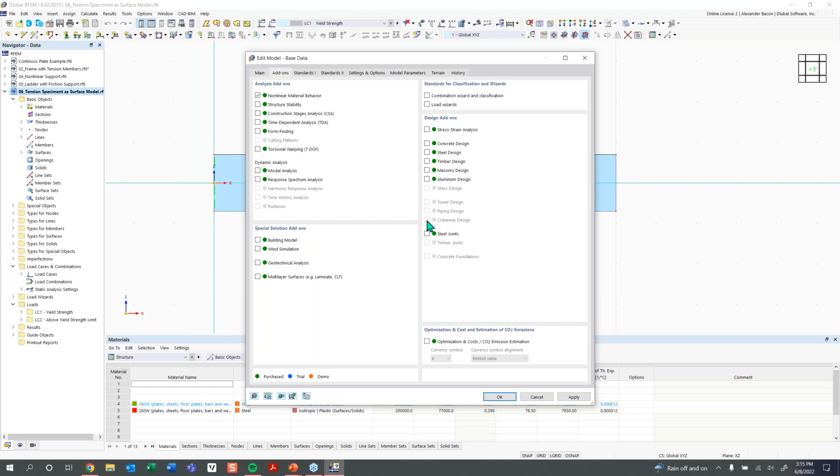Anyway, once we have this add-on activated, we can consider nonlinear behaviors. So we'll click OK, and now we can take plastic materials into consideration. And so now let's run the calculation for this surface with some pre-made defined materials. If I double click on this, we can see we have a thickness here of this plate or specimen. It's 3 millimeters thick.

And you can see the material that we're going to be using is an isotropic linear elastic material. I have another material defined here, and this one is an isotropic plastic material. So first we'll choose the isotropic linear elastic material and click OK. And so now our material is set to that isotropic linear elastic material. It is just steel 260 or 260W.

And so now with our load case here, we can just run the calculation. You can see I have a line load here applied to the end of it, and we have some supports on the left-hand side here. So this line load is going to pull this specimen in tension, and we can run the results and see what that looks like.

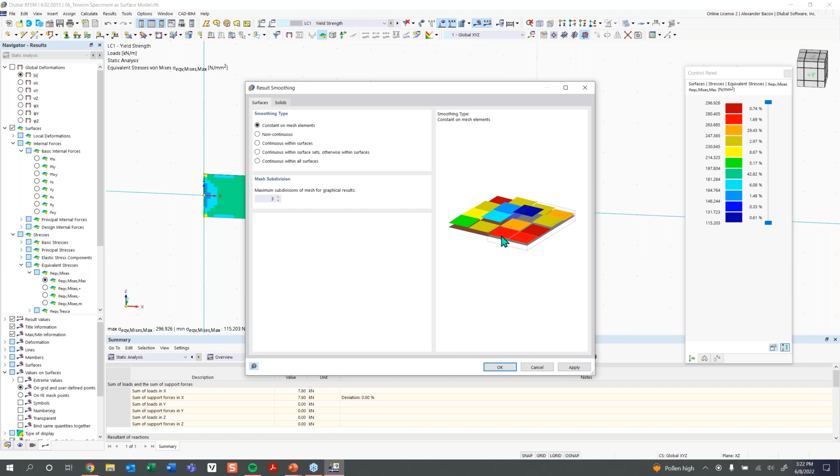Normally, again, by default, this is set to continuous on surfaces, and you can see how each FE mesh element can take into consideration the results from surrounding elements, but we just want to see the average of each FE mesh point on one single finite element. So with that said, we can click OK. And so now we can see the areas of the element that are higher than 260 newtons per square millimeter.

So with my control panel here, we can see the color coordination. I can zoom in a little bit more, and you can see we have that maximum loading applied, and you can see these red and darker red areas right here at the very top, in which this plate is experiencing higher stresses than 260 newtons per square millimeter. And to even better visualize this, we can double click on the color panel here, and we can set a limit here to 260. And now you can get an even better visual of where the material is exceeding that yield strength.

So you may be thinking this is steel and it's an isotropic material, and this can't happen if it exceeds that yield strength. This limit can't be exceeded. That's the yield strength. So these stresses wouldn't be shown realistically, and they wouldn't be passing 260 Newton per millimeter squared. But we were getting stresses higher than that.

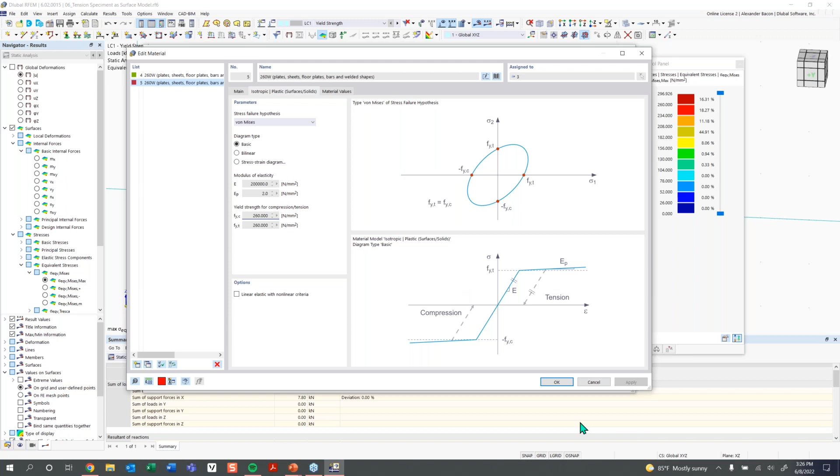So now let's run the calculation again, now that we have set our material to a plastic material, and let's see what that's going to look like. So this is interesting. Now you can see our highest stresses while viewing our von Mises stresses on the surface are 260 newtons per square millimeter. So perfect. This is awesome. Since this is a plastic material, no points on this plate should be experiencing stresses higher than 260 newtons per square millimeter. This is because now the stresses can be spread out and cannot exceed 260 newtons per square millimeter.

And we can see where this plate is basically yielding. So it's hitting that max there. And then we can go over here on the left-hand side, check on criteria. And now you can see even better where this plate is yielding. Wherever 1.0 is, where this dark red is, that means these elements or these sections of this plate have fully yielded.

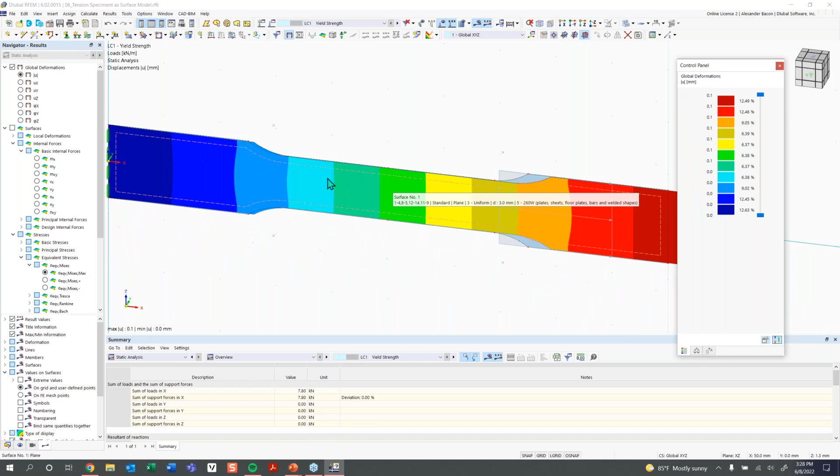So now let's test what happens when we set a load here that is higher than the maximum, which I have done already. So if we go to LC2, you can see I have just increased this load a little higher than what the maximum should be, so we can see what happens when we run these results. So now, let's take a look at the deformations at the exact limit of what this plate can handle. You can see we have our deformations here, and nothing's really deformed too much. It's just experiencing strain here in the X direction.

But if we look at what happens when the limit is exceeded, you can see here that where the material has fully yielded, the lateral strain is causing the section to shrink, and we're getting even higher deformations of 4.4 millimeters since this section has fully yielded. And we can even play a little animation here, and you can see the difference between before it's yielded and what it looks like after it has yielded.

So this is something similar to what you might see in your labs when doing your material testing. And these are the kind of nonlinear effects that you can consider with RFEM 6.

So now we can move on to our next subject and our last subject, which is singularities. So what are singularities? Where do they occur? Singularities are points of discontinuity in the calculation model. And this is an issue that doesn't only occur with RFEM 6. This issue happens in all finite element analysis software.

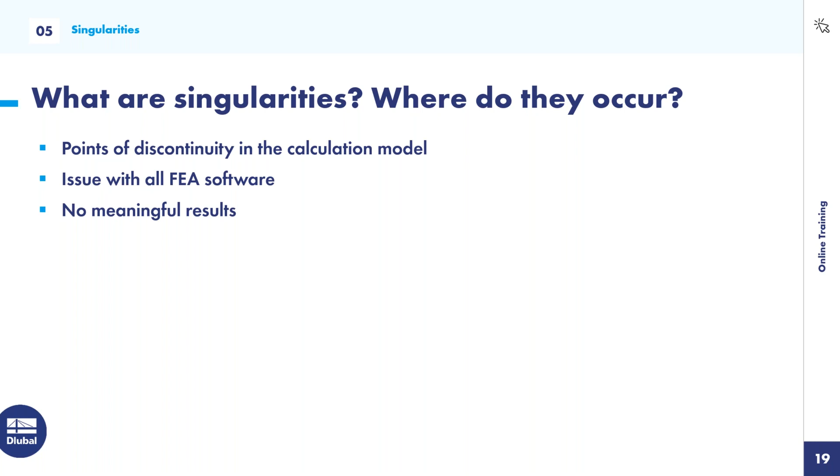And the result that comes out of a model with singularities, or at a singularity, is not meaningful or plausible and should not be taken into account. So what this means is that there is an issue with how RFEM solves the model.

There's no real physical issue with the structure. It's just how the software is solving the model. So this causes infinite stresses and internal forces at a singularity. So you'll see very high stresses, very high internal forces at that singularity. And so refining your mesh, or even just increasing the mesh refinement, is not going to improve this result or help at all. It does give you, though, a better idea of the location of that singularity.

So types of singularity locations: point loads and line loads and line supports can cause singularities. Openings or reentrant corners or connecting corners can cause singularities. And then stiffness changes due to a quick change to material or thickness can also cause singularities.

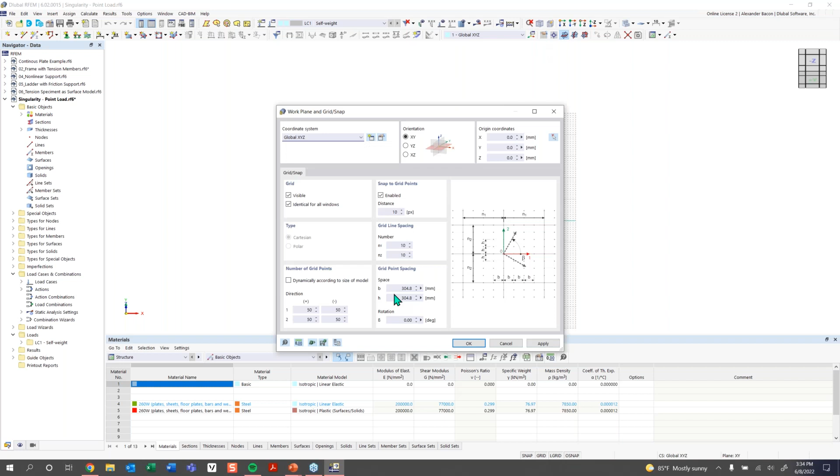And now you'll see our grid here, 50 by 50. Let's check our units. We will switch our units to imperial. And so now we have all of our units in imperial, and we have our grid spacing as 1 foot by 1 foot, 50 by 50. And now what we want to do is just create a concrete surface, kind of like what we did before. So I'm going to create a new thickness. You can see we have some materials and thickness carried over from previous examples.

So I'm going to click on new material. This is going to open up the material library. And so now I'm just going to type in concrete. I'm just going to make this concrete 4,000 PSI. And click OK. And we want the thickness of this to be arbitrarily 12 inches. Okay. And now we just need to draw out our surface here. It's going to be similar to the plates we've drawn earlier. So we're just going to make it 32 by 16.

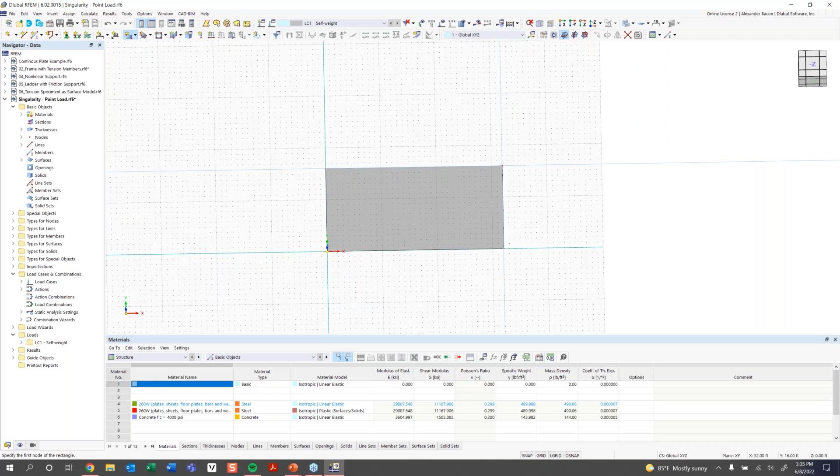And now what we want to do is add a node directly in the middle here. The easiest way to do this is we have a tool up here under new node called between two nodes. So I can click on that, and all I need to do is click on my two nodes here and click apply. And so now I have a node directly between those two nodes at the center.

And what we want to do is add a point load to that. And so now I'm adding a point load directly at the center of my concrete surface here. This point load's going to be negative 10 kips in the global Z direction. And so we can apply that right to the center there. And then we can just add line supports. We just need to support this now. So we're just going to support the entire edge of this plate here.

So I can just highlight the whole thing, go to line support, choose the preset hinged, and now we can make 4 copies of this. So we can highlight it, right click on it, move / copy, create copy. We want 4 of these. So we'll make 3 additional copies spaced out at 32 feet in the X direction.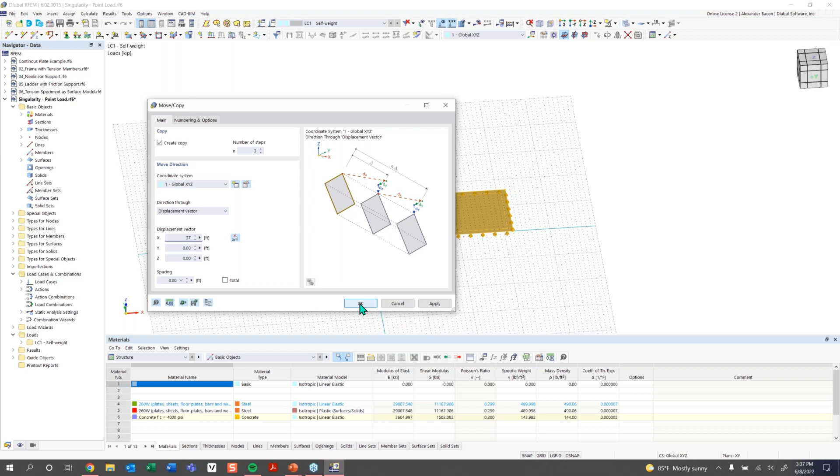And then if we didn't want to move our plates over, there's another option under grid settings to have the grid dynamically change according to the size of your model. So we could choose that. So now you can see our grid here has dynamically rearranged itself to our model. We don't really need the grid anymore, so we can deactivate that.

And then now we can create some FE mesh refinements. Another way to do that is we can go under structure here, basic objects. I just want to show you how to create these FE mesh refinements through the table, or how to use the table. So structure, we can go under types for surfaces here. And then we can find the tab surface mesh refinements. And RFEM wants me to save. Always good to save.

Never want to have something happen and you don't have your model saved. There's always backups created, but always good to save often. Target FE length is going to be, for this first mesh refinement, 7. And then we're going to make 4, 1.25,

and 0.4 feet. And now, since we know this is surface 1, I can turn on the numbering if I just want to see the numbering displayed real quick. Show numbering. So now we can see surface 1, 2, 3, and 4. So we want to assign the 7 feet to 1, 2, 3, and 4. So now our refinements were created here and we assign them to our surface.

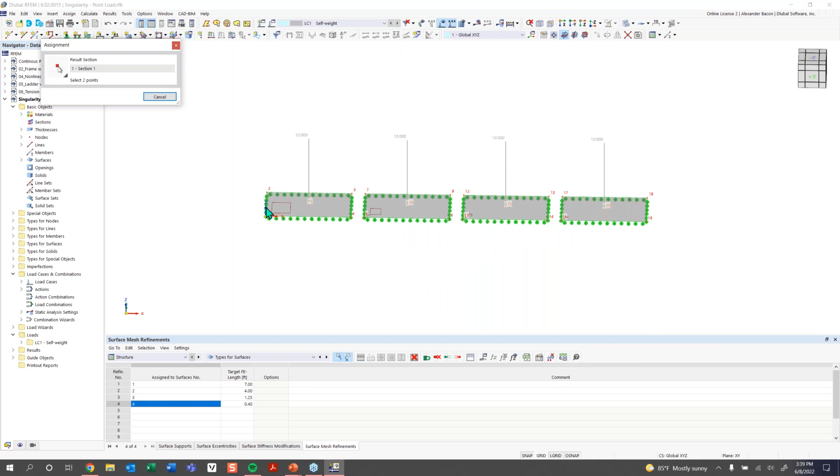And so now we just want to create a results section through our surfaces. So we're going to define that. Click OK. So you can see our LC1 here. We want to edit that to not take into consideration self-weight. So let's deactivate that. We'll just not have a name for it. And now let's run our calculation, see what happens.

So once our calculation runs, we'll get a better idea of what this all looks like. So first, before we look at anything, let's make sure results sections are activated, which they are. And then we want to go down here to our result views under results sections here, and we want to activate local extremes. So now we can see the extreme of each surface here.

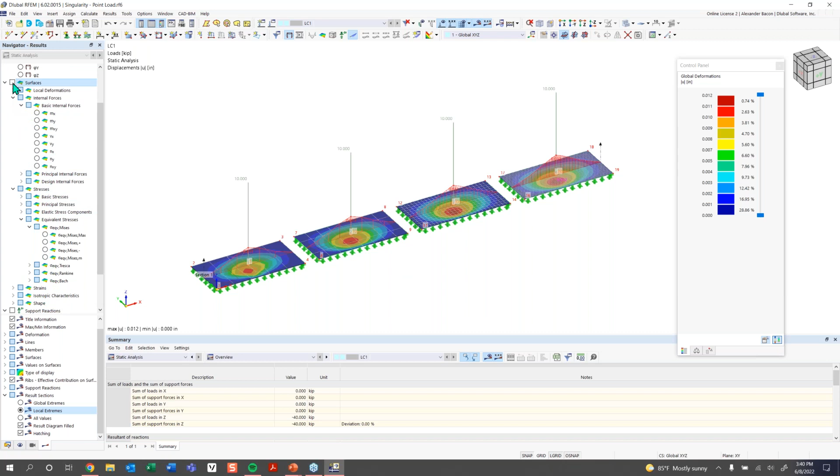And our deformations look okay. They look good. Nothing out of the ordinary here. Again, you can see our FE mesh there. Let's take a look at our bending moments on our surface here. So I'm going to activate surface results, moments along the local x-axis, and we can see our bending moments there. We have on the left-hand side here negative 2.9 kip feet, and we have a maximum over here of negative 5.59 kip feet.

So like we talked about earlier, we know that a finer FE mesh is better than a very coarse FE mesh like this left-hand side here. But which moment is the correct moment here? The answer is none of these. None of these moments are the correct moment. And that is because we are experiencing singularities here. And so these results are not meaningful or useful, and we cannot use these results.

And it really doesn't matter what size our FE mesh is here. None of these results are good. Even this one here, that's super fine. You would think I have a super fine FE mesh here, this result has to be accurate, but it's not. It's just giving us a higher result, and it's allowing us to just see more clearly where this singularity is happening. So what's the solution?

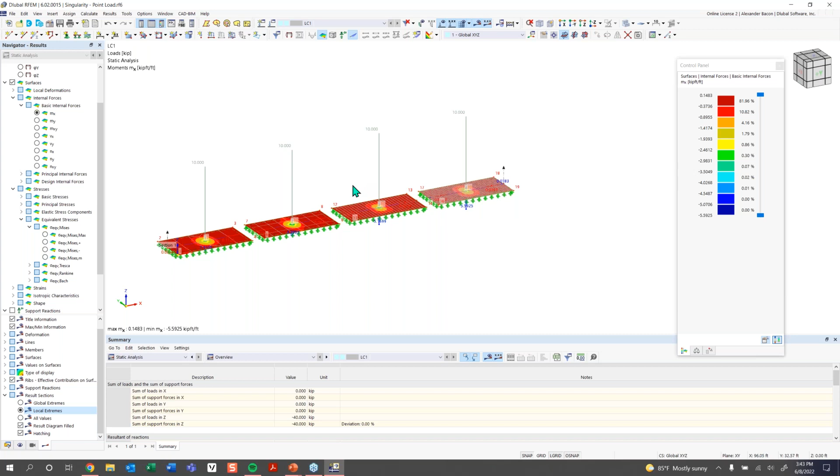The solution is to take this point load here that's feeding directly into one single FE mesh element and distribute this point load somehow. And to distribute this point load, we can spread it out using a surface load. So we can take this load, this 10 kips, and we can pretend that this load is a column and the area of the column is 2 feet squared. So let's delete these point loads.

Yes, and we want to now apply some surface loads. So before we apply the surface load, maybe it's a good idea to show you what the rendered thickness of one of these surfaces looks like. So if I go down here into the display tab, under model, I'm going to actually decrease the size. I cannot. So we're going to go under model here, rendering, model, solid model, surfaces, and we want to choose filled thickness.

And you can see that the center line of these surfaces is located directly in the middle of the thickness. So you can see what the actual thickness of these looks like. And the reason it's good to know where the center line is located is because this is where the surface load is applied. And normally for concrete structures, the forces will propagate from the location of the load through the concrete at a 45-degree angle. So this is always just good to keep in mind that the loading is going to be applied at the center of the thickness.

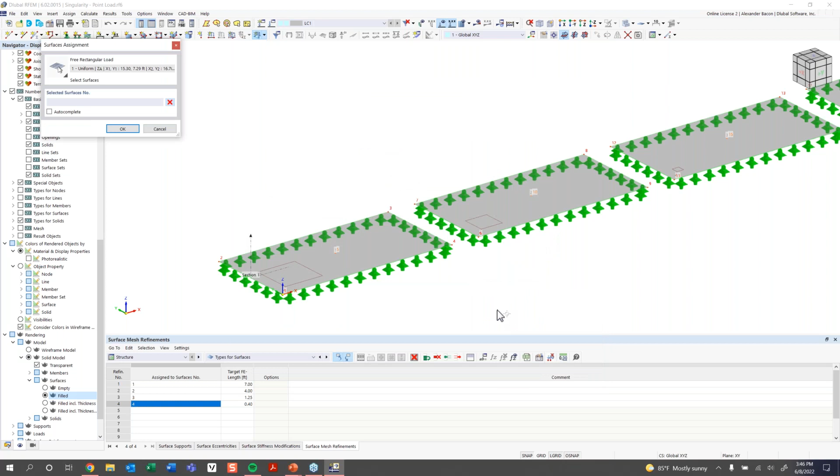Now we can click OK, and then we can just click on each one of these surfaces here, click OK. And now we have our free rectangular load here.

I need to give it a negative sign to flip it, and also assign it, but we've got to keep it at the center. It's fine, we'll click OK, flip it, and now we can just take our load here, hold Control, and move and copy it to our other surfaces.

So now we have our free rectangular load applied to all our surfaces. So we can hit calculate, and this calculation will run.

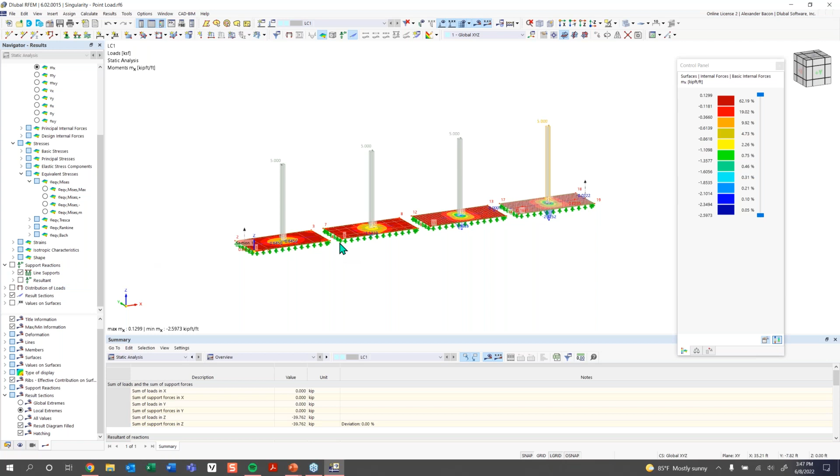Now we can take a look at our moments here. We got to activate and look at our moments. So now we're getting no singularities because at every surface we have similar moments. It's not as drastic a change, but you can see between these last two surfaces, 1.9 and 2.3, it's definitely a lot better than before.

This is one of the ways you can combat point loads when they cause singularities. Again, you can see our loading is not just feeding into one singular FE mesh point. It's being distributed across multiple FE mesh elements, which means we are avoiding a singularity issue. So it's always good to know multiple FE mesh nodes is better than just one.

Another way to combat singularities, if you have a results section, is to go into the result diagram, maybe while analyzing your results there. There's a tool that allows you to smooth over results or average them out over an area, which is called smooth areas. You can see smooth areas are turned on right now.

What we can do is edit our smooth areas and choose a range. We need to tell the program between what location and what location the smoothing needs to happen. Usually this smoothing range is based on a connecting element or connecting column, so the range would be the length of that column. We're just assuming our column is 2 feet squared, or 2 feet by 2 feet.

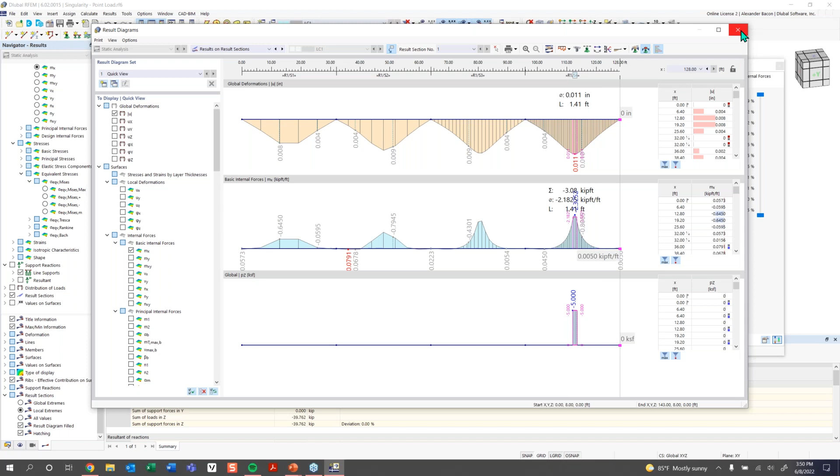So I'm going to exit out of that. And the next example, this is the last example I have. Normally I would model through it, but we're running low on time, so I'm just going to open an already saved model that I have here, and we can go over it.

So here you can see this is similar to our last model, but with this model we have to turn off the results here and shrink. Usually we would model through this, but we're running out of time, so I'm just going to go over it. We have a plate here, and each of these plates has a surface load applied to it. You can see we have a nodal support connected here, so we just have this nodal support, and it's supported on this edge.

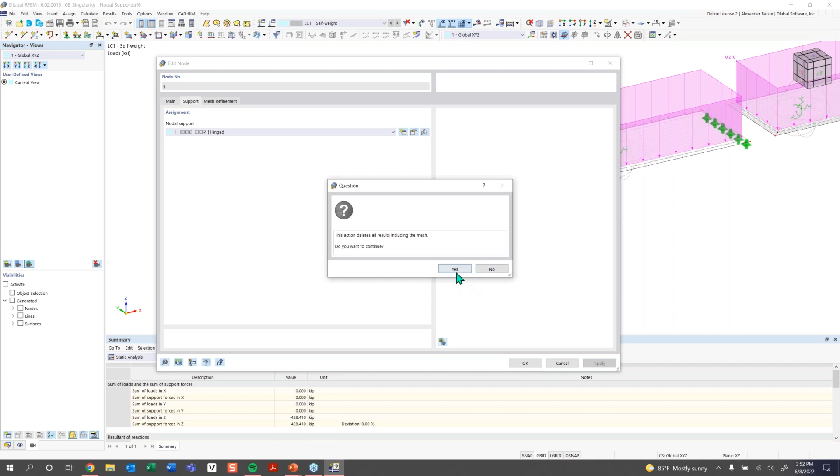So what's happening is this nodal support — if I change it to a normal hinge support, one second. Okay, we're just going to create a new nodal support here. We want it to just be a normal hinge support. There we go. And we'll change all of these to hinged.

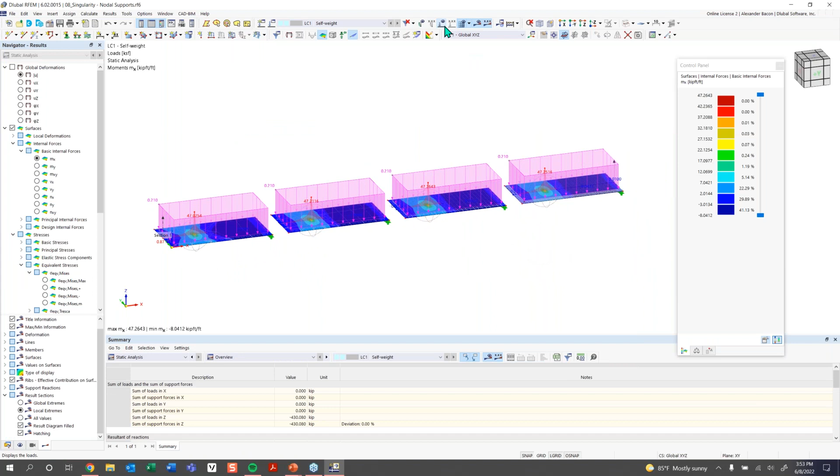Okay, so if we run our results now, all we have is just this one nodal support holding up our plate here. And again, if I turn off the loading, you can see — well, we should be seeing a difference in results. I think I need to delete these.

So you can see how drastic these results are in this, and so you always have to be careful when using nodal supports and having them support a surface like this, because since they are completely rigid supports, all of the loading is going to be fed into this one single location, and that's also going to cause a singularity.

One way to combat this is to change your supports from completely rigid to semi-rigid, having less stiffness to them. Or you can also use the smooth ranges within the result diagram.

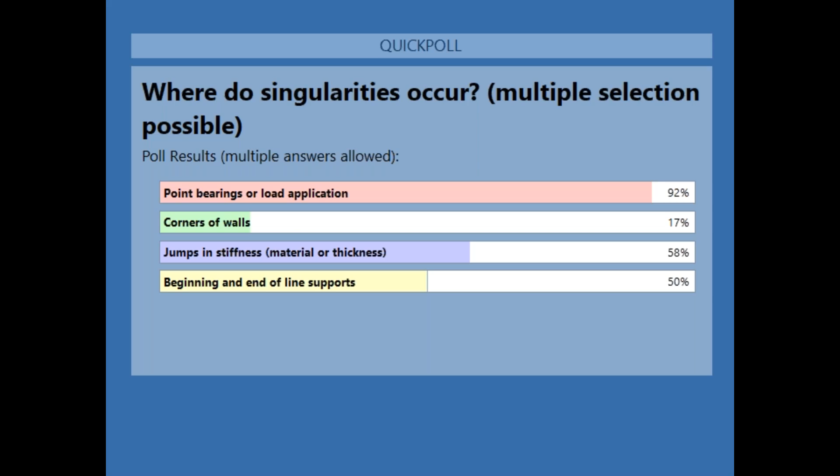Once you click on that, you can see Alex, here. Can you show your... Oh, RFEM? We're still seeing the poll. Oh yeah, thanks, Siska. Yeah, I didn't see that. Yep, sorry about that.

Yep. So if you pick a material from the library, you can check the user-defined material box at the bottom. And then you can also change the values under the material values tab. Yeah, that's true, that's another way to do it. Yeah, that's good to point out as well.